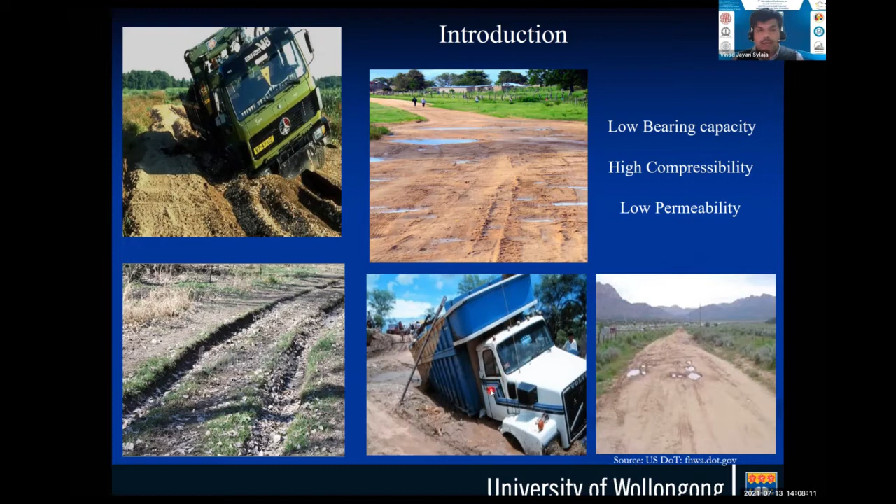So as a practicing engineer, if you face problems on soft subgrade soils, what we generally go with is looking at improving the soil strength by dewatering. And if you look at dewatering, we have a lot of technologies developed in hand. We have preloading, which is a pretty old technique, preload surcharge, or using vertical drains.

So you can see if you have a soft subgrade, you can use a preload and create additional drainage using vertical drains, and accelerate the consolidation process. So we already have established quite well information on how to improve the soil strength using these kinds of techniques.

Now, on the other hand, we do have materials. For example, if you look at the geosynthetics perspective, we have geotextiles, geogrids, and geomembranes, which can basically provide strength towards these materials, and provide additional reinforcement effect for the subgrade, sub-ballast or sub-base materials. You can see a couple of photos I've shown here, where the geogrids have been used between the interface of the subgrade and sub-base layer, acting as a reinforcement mechanism.

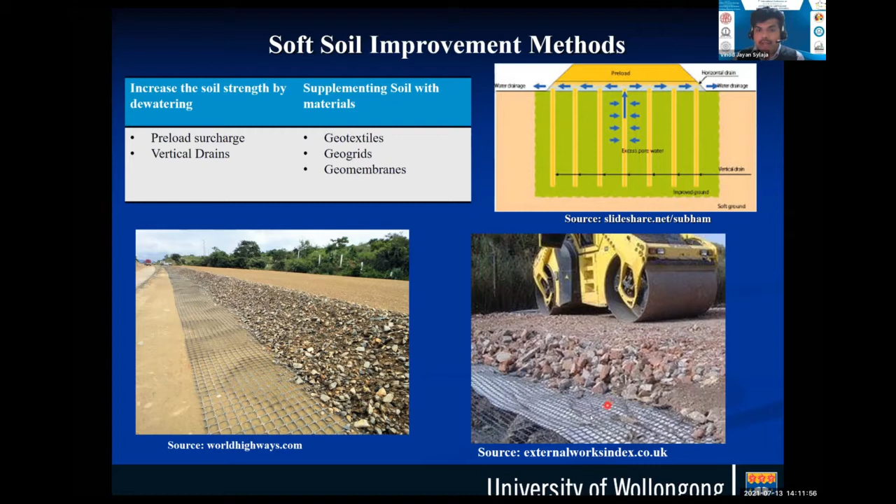Looking at that perspective, the application of natural materials like coir geotextiles and jute gives very promising prospects, as it won't create any kind of unnatural waste materials, thus giving a low carbon footprint.

Now, coming to coir geotextiles, which I'm a bit interested in today to look at and showcase some preliminary findings we have from the numerical modeling. So those who are new to this, as you can see, coir geotextile is basically a thin, flexible, permeable sheet made of coconut fibers, which enhances the mechanical behavior of soil.

And as I've mentioned earlier, we do have a lot of work carried out in this area for the last two decades looking at the improvement in soil stability. For example, if you look at slope stability, we have used coir geotextiles pretty comfortably in controlling the movement or the instabilities of soil slopes.

The advantage of having these kind of natural materials, according to me, is this mechanism needs to be strengthened. It acts like two cases. One, in a short-term perspective, this material will behave exactly like a synthetic material, which provides a reinforcement effect.

And in a long-term perspective, what happens is, due to the biodegradable nature of this material, it can leach lignin into the soil, which leads to a kind of chemical stabilization later on in the soil. So we have observed this kind of mechanism, but we need to understand it a bit more and come out with a model which can be used comfortably by a practicing engineer to predict this behavior for the short-term and the long-term perspective.

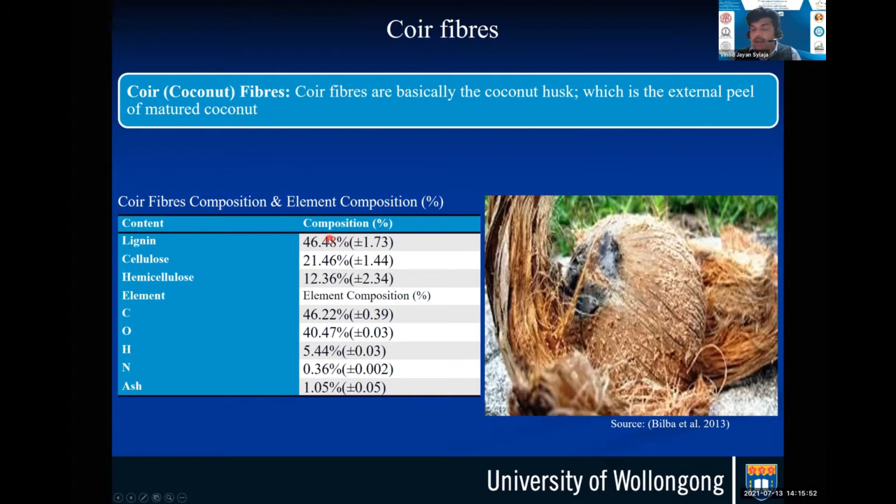In short, you can see coir geotextiles have desirable engineering properties. It's eco-friendly, there's no doubt about it. And you can see the biodegradable nature of the coir geotextiles.

And if I expand a bit on biodegradability, we can see that it has both advantages and limitations. So the major advantage is that it biodegrades, and in a few years time the material disappears. If the infrastructure we are looking at is only for a short-term perspective, we will get the maximum benefit out of this material in that time period, and then it completely degrades.

And if you are looking at a transport infrastructure condition, you can just mix the material up, and it becomes a kind of fiber reinforced soil, which further enhances the properties of the subgrade material. So that's the advantage of it.

And the limitation, as you know, is whether we need to apply this material for a long-term condition or a short-term condition. That's where we need to draw a fine line. And that's where it is highly important to develop a biodegradable model to predict the applicability of this material for infrastructure development. So that is actually our ultimate goal in this research.

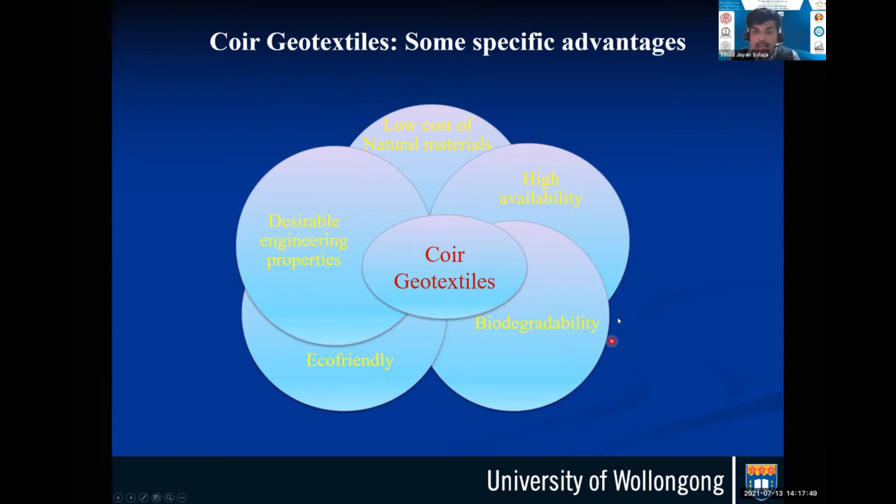With that broad aim in hand, we look at this material in terms of functions. You can see that the major function is exactly the same as that of the geosynthetic material, like reinforcement. It acts as reinforcement, it acts as separation, it has filtration, it can be used as drainage. So it performs exactly similar to the geosynthetic material. The only thing is that the biodegradability of the material needs to be considered in all these approaches.

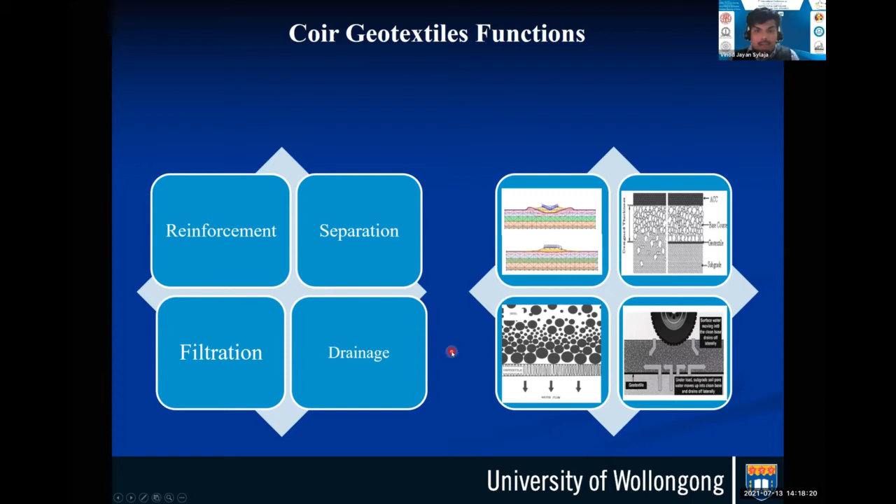So we are trying to use these materials for different infrastructure construction, but we need to understand a bit more from the very fundamentals how this can be designed in the first place for long-term and short-term stability point of view.

Let me quickly show you some work already being carried out experimentally on the bearing capacity or load settlement behavior of this material. You can see a typical load settlement behavior of an unreinforced soil, showing applied pressure versus settlement. For an unreinforced material, if you reinforce it with different coir geotextiles, there is an increase in the applied pressure. So the bearing pressure increases with the inclusion of coir geotextile, clearly showing an increase in stiffness and in the applied pressure or failure pressure with the application of coir geotextiles.

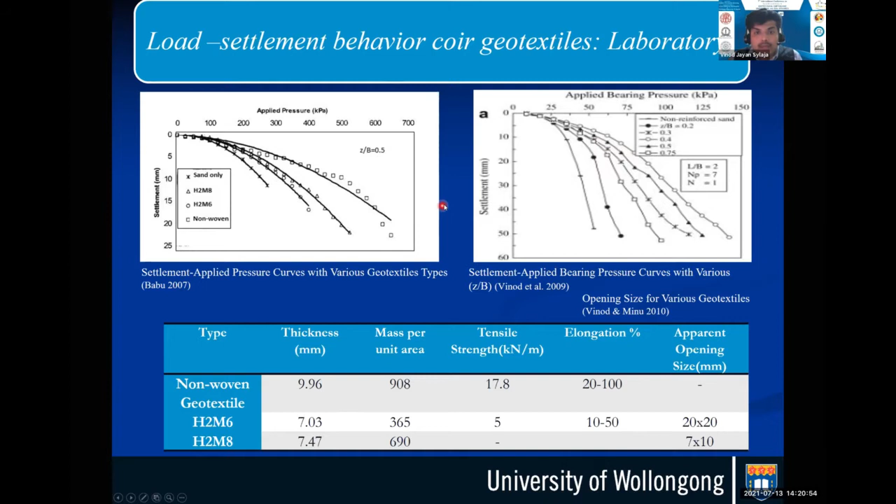When it comes to cyclic load, we could only find very few works on coir geotextiles. What I'm showing here is work on geosynthetics, showing how the settlement responds with and without reinforcement under cyclic loading - how settlement is controlled for different subgrade conditions using with and without reinforcement under cyclic loading.

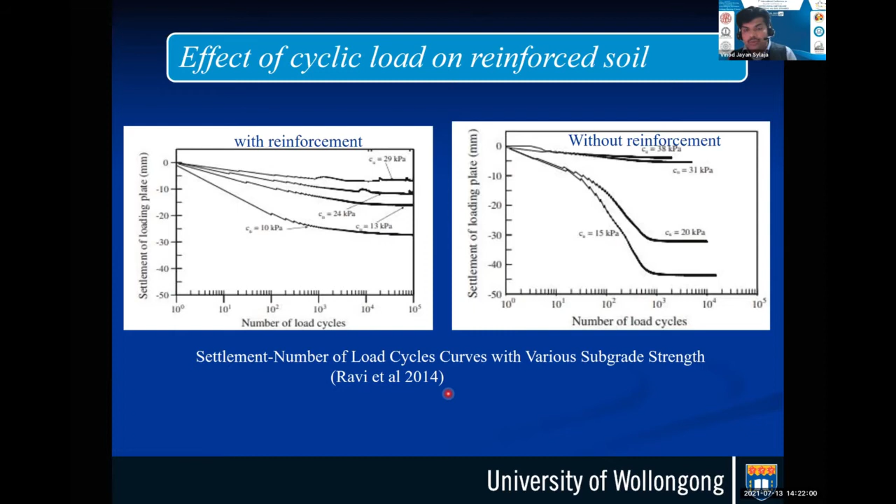Now that's where the challenge lies. We could rarely find literature on the cyclic loading of coir geotextile reinforced soil. Therefore, we are carrying out at our university a detailed large-scale testing on the cyclic loading of coir geotextile reinforced soil so that we can validate these models before applying them to design any kind of transport infrastructure.

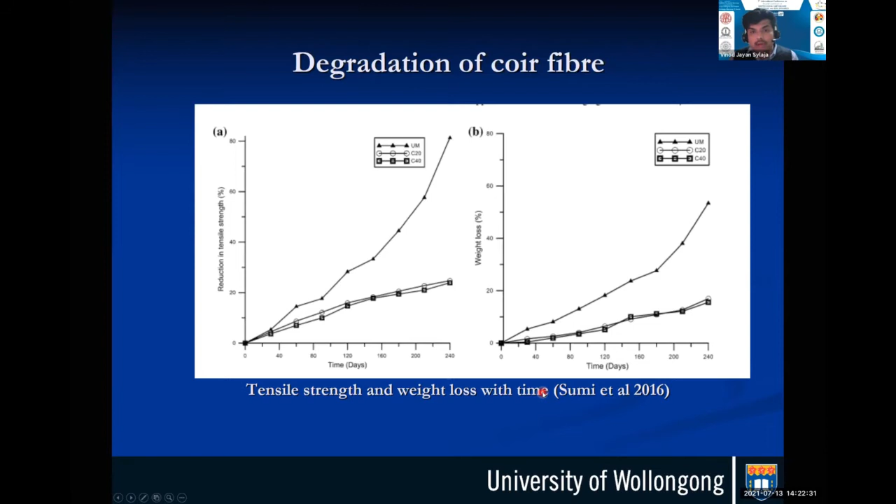So with that, let's move on to the numerical work we have carried out. I divided it into part A and part B, where in the first part we look briefly into the monotonic loading, which was carried out basically to calibrate the model. We have three different conditions to look at.

The first is the unreinforced condition, where layer 1 is considered as a sub base and layer 2 as a subgrade. In the second condition, we have a coir geotextile going at the middle of the sub base layer. And in the third condition, we put it at the interface between layer 1 and layer 2. So these are the three configurations we have looked at in our model.

Our model has a size of 500 by 800, similar to one of the literature studies which shows the load settlement behavior under monotonic loading. The material properties are pretty much the same - we have looked at well-graded gravel.

We have placed reinforcement at the interface and at the middle of the sub base on layer 1. The reinforcement is considered as a plate element using a linear elastic model. For the soil, we have gone for a hardening soil model with small strain stiffness, so that we can capture the variation of modulus with respect to shear strain, which is critical for the dynamic analysis.

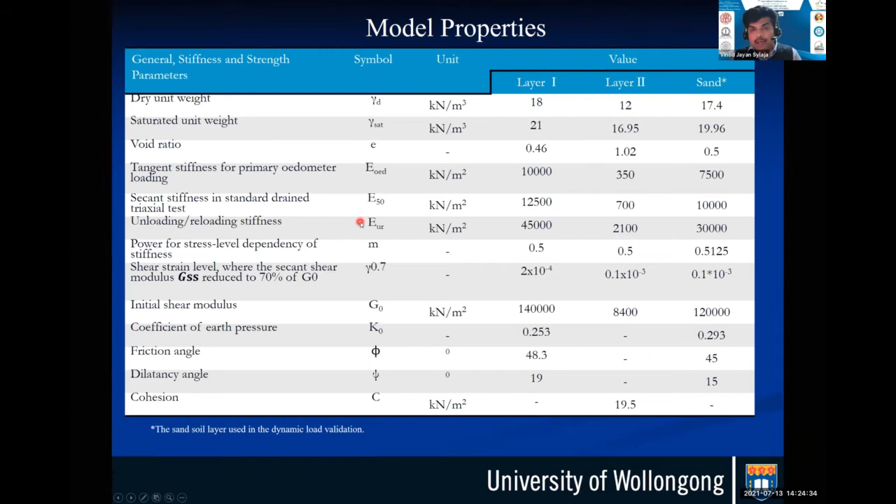I'm not going into the details of the soil properties here, but these various soil properties were adopted based on the work reported by Subaida in 2009 in one of the laboratory experimental works on coir geotextile reinforced soils. After that, we compared and calibrated our model with the experimental data.

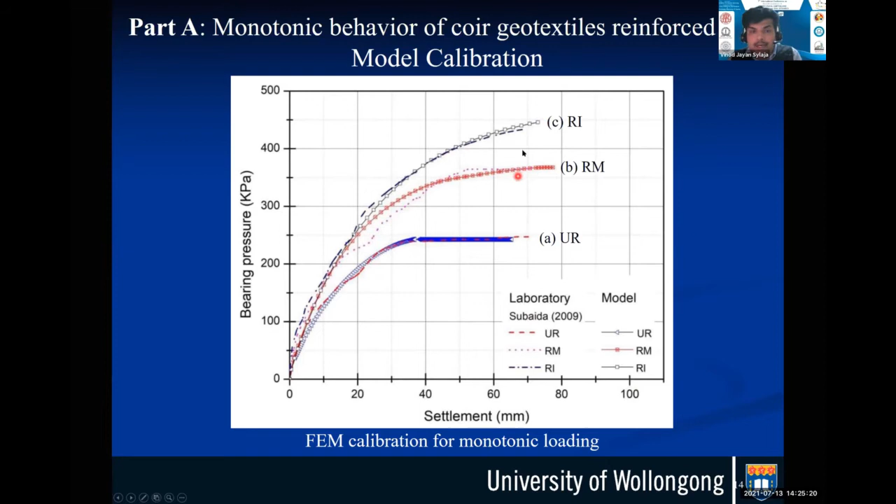You can see that's unreinforced bearing pressure versus settlement response from this finite element model compared to the laboratory work reported by Subaida, with reinforcement at the middle and at the interface. Our model has captured the results very similar to the laboratory experiments. And you can see here at the interface, as expected, has shown a very high bearing pressure compared to the other reinforcement placed at the middle of layer 1.

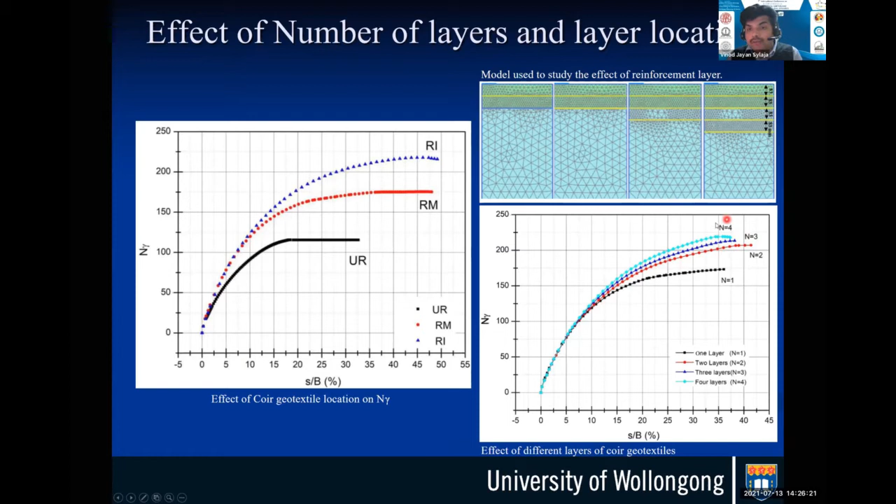We looked at different layers of reinforcement to see whether the number of layers can influence the bearing capacity, and we have observed that increasing the number of layers has an insignificant influence on the increase in bearing pressure. Anything greater than 2 has not contributed much to the increase in bearing capacity. So there is an optimum value that we need to look at when it comes to designing inclusion of geotextiles into infrastructure construction.

We looked at the friction angle, how the friction angle is going to affect the bearing pressure. With increasing the friction angle, the N gamma increases as expected. A similar trend has been observed for the reinforcement at the middle and at the interface. So there are no surprising results here with increase in friction angle. We have observed an increase in the value of N gamma.

Similarly, an increase in the modulus of the subgrade has also shown an increase in the value of N gamma for the unreinforced material, reinforced at the middle, and reinforced at the interface. So these results highlight that our model is able to capture the response very similar to the laboratory investigation.

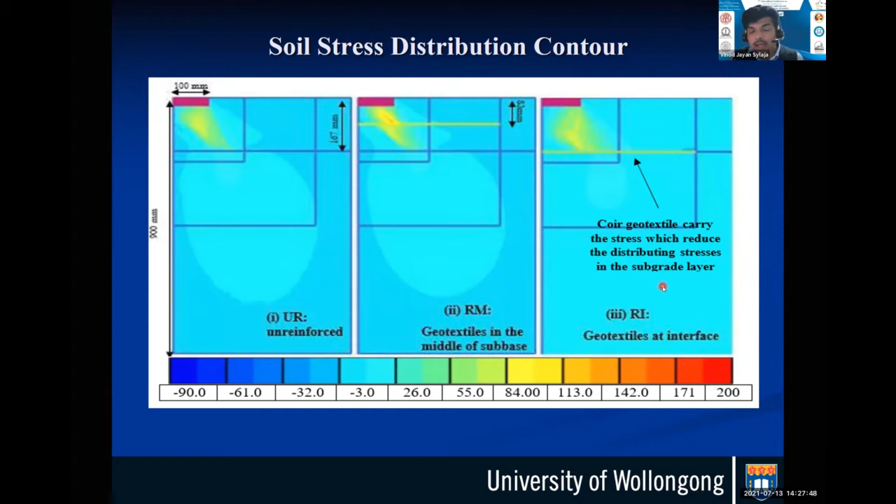Looking a bit more closely into what's really happening inside the sample, you can see how the stress distribution is happening. That's the stress for an unreinforced soil. With the reinforcement at the middle, we could reduce it a bit. But with the interface, we could control the pressure very carefully by reinforcing at the interface of the subgrade and the subbase layer, or layer 1 and layer 2.

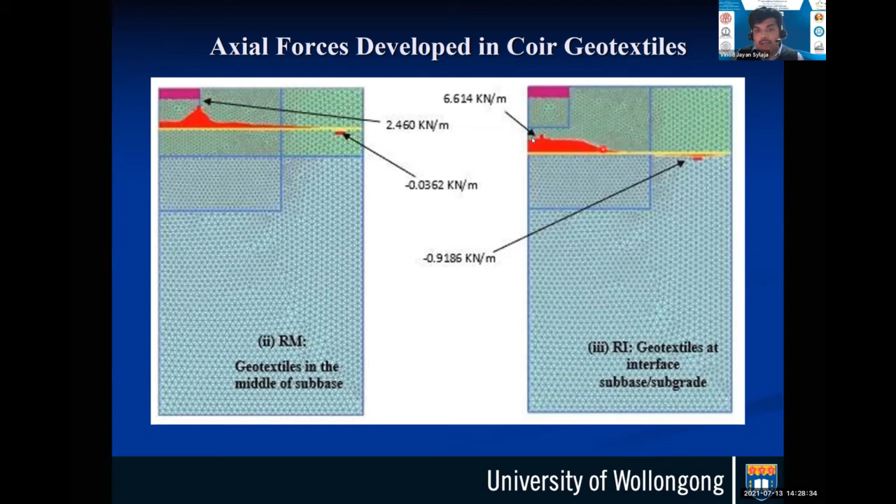Looking at the axial force developed along the reinforcement, you can see a more distributed axial force developed at the interface when the geotextile is placed at the interface between layer 1 and 2, compared to the reinforcement at the middle of layer 1. There's a very high axial force developed here compared to what's reported at the middle of layer 1. So that's a more uniform type distribution, very consistent and similar to what was reported by Kurian in 1997 on the variation of axial force along the reinforcement layer.

All right, with that, I have only 5 minutes here. Let's quickly move on to the cyclic loading of geotextile reinforced soil.

We had gone through a bit of a challenge here without experimental data, on how we are going to model the geotextile reinforced materials under a finite element or Plaxis software. Luckily, we could find one literature by Sridhar and Kumar looking at the cyclic loading of a geotextile reinforced soil in a fully immersed sand condition. So we picked that up to calibrate our numerical model.

We have simulated a different condition very similar to what the laboratory experiment work has been reported by Sridhar and Kumar, and we have tried to capture with our model whether we can capture the variation of settlements with number of cycles very similar to what they predicted in their paper in 2018. The challenge here is to develop a cyclic input in Plaxis software to capture this behavior. That was one of our key challenges.

In modeling or extending this model to capture the behavior under cyclic loading, with the new input that we have created in Plaxis, a subroutine developed in Plaxis, we could capture the settlements versus number of cycles very similar to what has been reported by Sridhar and Kumar under cyclic loading condition for a cyclic stress of 100 kPa and a frequency of 0.5 hertz. It's a very, very small frequency for a traffic condition.

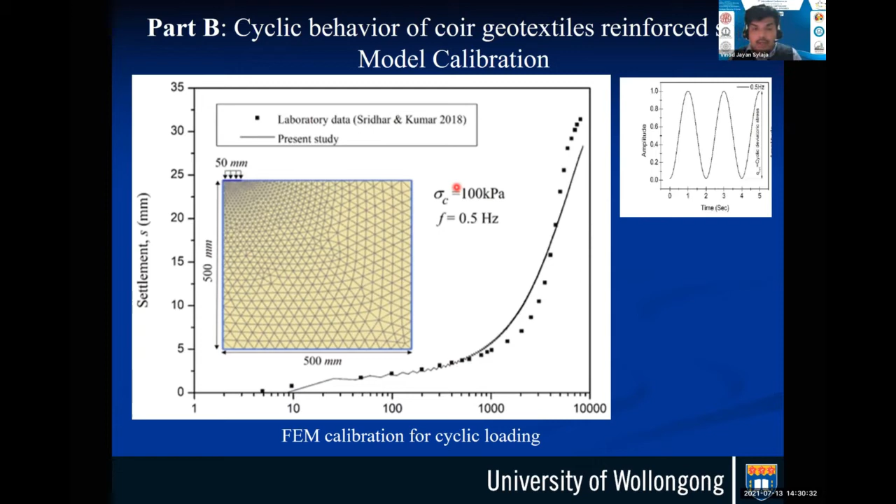We then extended that model, similar to the layer 1 two-layer system which we calibrated in the monotonic condition, to look at the effect of the amplitude of cyclic stress and frequency on the performance of the coir geotextile reinforced soil.

Now we looked at the effect of frequency: 0.5 hertz, 1 hertz, and 1.5 hertz. I'll tell you that's a very small frequency when we're looking at a transport condition, but it still captures the behavior of frequency under different conditions like unreinforced, reinforced at the interface, and reinforced at the middle of layer 1. Similarly, the performance is slightly better when the coir geotextile reinforcement is at the middle compared to the interface under cyclic loading condition.

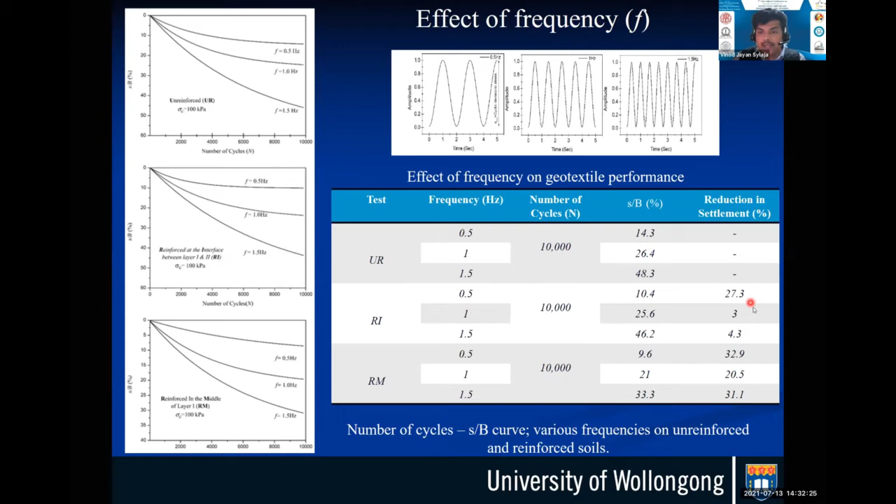Now we looked at that - what's really happening here? We kept everything the same, exactly similar to the monotonic loading condition, but we observed a slightly different behavior compared to the monotonic condition.

We then looked very closely into the axial stress developed on the coir geotextiles, and we observed that a very high magnitude of axial stress, or axial force, has been developed when the coir geotextile is at the mid of layer 1 compared to the interface.

That's probably due to the kind of load application we used under both static monotonic and cyclic loading. In the monotonic loading condition we used a strain-controlled approach, and here it's a load-controlled approach. So there's a significant difference in the performance of the reinforcement due to the application of the load or the type of loading we're trying to do.

We need further experimental evidence to highlight the findings we've observed here. That work is currently in progress.

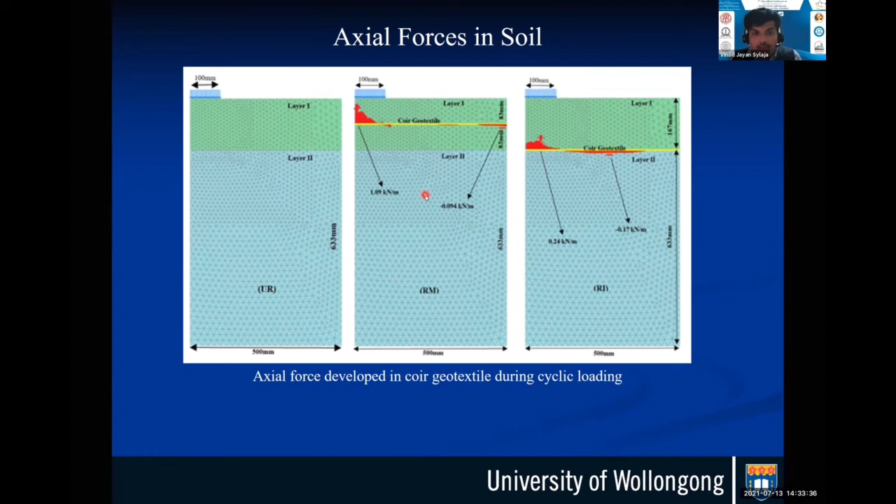So let me quickly conclude: this preliminary numerical model captures the soil bearing pressure versus settlement behavior, very similar to the laboratory experiments reported by Subaida, Sridhar, and Kumar, for both monotonic and cyclic loading.

Coir geotextiles were installed at the interface between layer 1 and 2, and in the middle of the layer, and placing the coir geotextiles at the interface led to the optimum performance under monotonic loading. There's no surprise - a lot of work has been carried out, and this basically strengthens their findings in the application of coir geotextiles.

Now, the number of layers - I've already highlighted that the number of layers shows an insignificant influence for n greater than 2. The application of coir geotextiles between layer 1 and 2 reduces the settlement by around 38%.

So I indirectly calculated the reduction in settlement for synthetic material, which is very, very close from a short-term perspective. So this material can behave very close to synthetic materials in the time frame we're looking at. The performance is quite good. We didn't have a direct comparison, but an indirect comparison shows it can perform very similar to synthetic materials.

The inclusion of coir geotextiles in the middle of the layer yielded the best performance under cyclic loading condition. Please note this is considering the cyclic stress levels we considered in this investigation, which requires further validation using large-scale experimental test data.

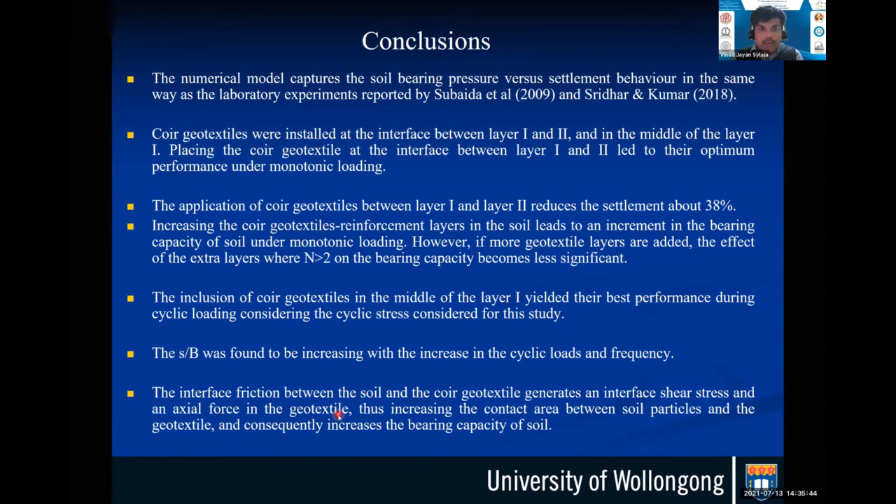Limitation: I need to be very careful about the limitation of application of these coir geotextiles for different infrastructure construction. First, coir fiber degradation and its effects on the response of reinforced soil. It is very critical that we develop a model which captures the degradation of the coir fiber, and that needs to be integrated into any model to capture the short-term and long-term perspective.

If we can predict the time frame up to which this material is going to perform, that is exactly what a practicing engineer will be looking for before a wide application of this for any infrastructure development. Effect of different sub-base and subgrade material, including stress rotation during traffic loading, needs to be investigated.

High frequency, we have only looked at around 1.5 hertz, which is very small for a traffic condition, and we need to look at a very high frequency and very high cyclic stress amplitude before applying this to any kind of pavement infrastructure. Finally, we need large-scale validation of the model with detailed large-scale and field investigation, which needs to be done before applying this to any field application.

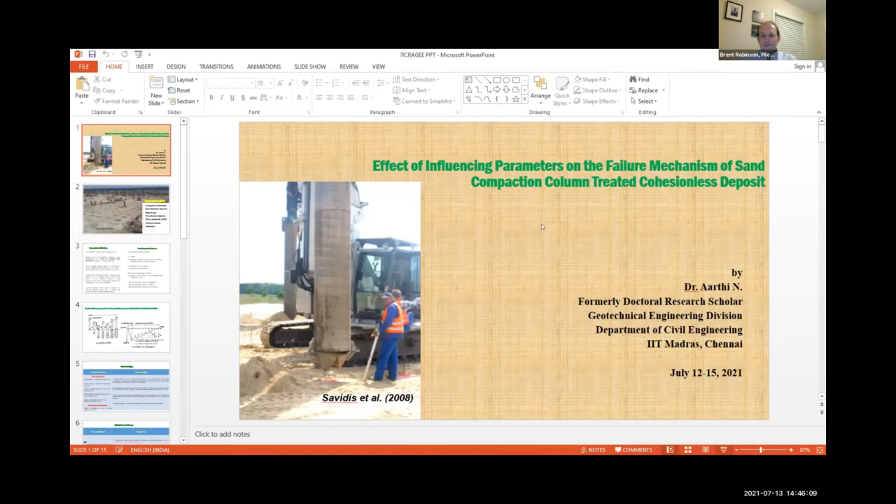Are you guys able to see my screen? Yes, we are, and we can hear you very nicely. Thank you. One minute, is it fine, sir? All good, still to go? Good, thank you very much. Go ahead. And can you give yourself a brief introduction too?

Yes, myself Aarthi Natarajan, and I've recently completed my doctorate in Geotechnical Engineering from Indian Institute of Technology Madras. I'm presently working as a lecturer near my hometown in Tamil Nadu. I'm very happy to be here to present my work. This is one among the part of my PhD work, and good to meet you all for this nice occasion. So let us start, I'll try to stick to the timings since I have a class to go.

So this is basically about one among the ground improvement techniques called sand compaction piles. This is a very specific topic that will be keenly focusing on the effect of influencing parameters on the failure mechanism of sand compaction column treated cohesionless deposits.

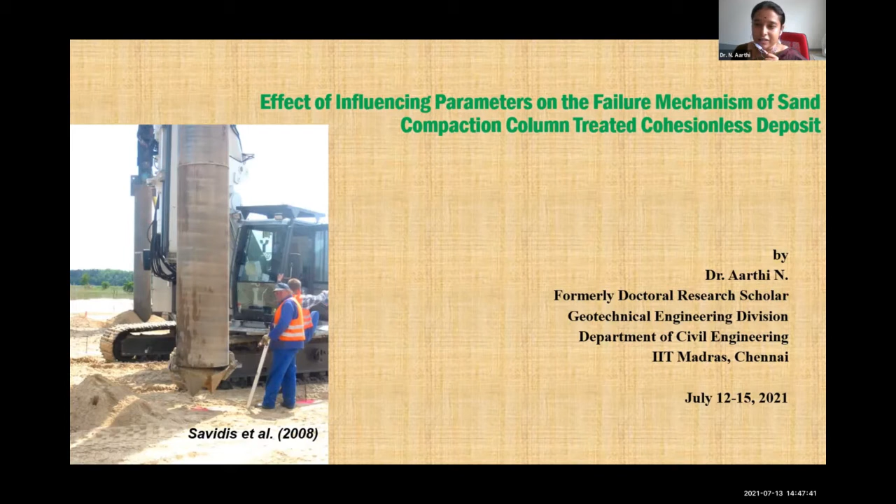This is a picture showing a field application. This is a casing that has been used in most cases - one among the casing equipments that are often used in field applications to install these sand compaction piles. I thought it very appropriate to put this picture on my front slide so everyone right away understands what I mean by sand compaction pile.

Coming to the outline of my presentation, this is how it will go: introduction and motivation behind the study, sand compaction columns - what are they, the research gap - what exactly is the gap and where my work is fitting into the literature, finite element modeling and failure mechanism of sand compaction columns, the parametric studies, and the conclusions.

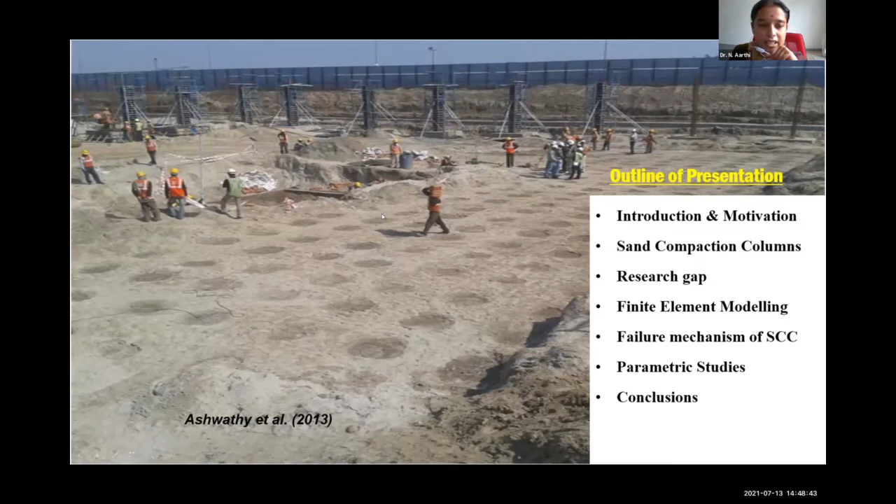This has been taken at an actual site near Ghaziabad in Delhi, where sand compaction piles have already been carried out in the field. You could see it is of a square pattern, already installed in this particular layout, and it is yet to be installed over there while the workers are doing it. This has been taken from an article by a good friend of mine.

Straight into the topic - I just want to introduce it to you all. In India, we have majorly 3 problematic deposits: loose sands, marine clay, and expansive soils. Among these, my area of work is on loose to medium sand deposits to improve their bearing capacity, etc. When you look upon any type of granular column inclusion, vastly there are 2: stone column and sand column.

As far as stone column is considered, you have n number of articles so far, and the entire Western Hemisphere has done so much about stone column. Sand column is the contemporary of stone column, and it is much more famous in Southeast Asian countries, including Singapore or Japan. It is a method invented in 1956 in Japan - the art of carrying out a sand compaction pile or column, whatever you can name it.

As far as this topic is concerned, moving on to finding how sand compaction pile installed cohesionless deposits - that is, improved cohesionless deposits - fail and their failure mechanisms, and what parameters would affect such improved deposits in real-time application - that is my cup of tea as far as this article is concerned.

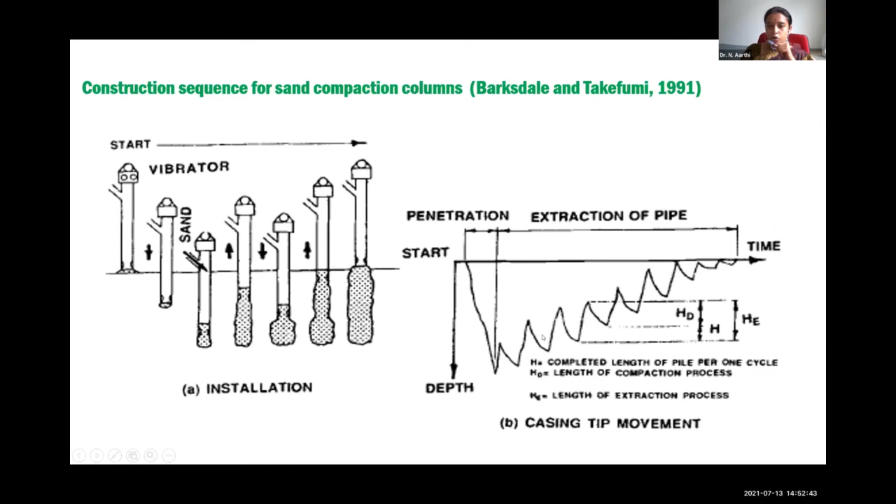Coming to the research gap: stone columns are contemporary to sand compaction columns, and stone columns have numerous articles covering static loading, cyclic loading, lateral loading, stress sharing mechanism, and failure mechanism of stone columns in clays. But such in-depth studies are very hard to find for sand compaction columns in cohesionless deposits. I was able to find only one study, and that too in clay only; in sand there is literally none. So this attempt is addressed to fill that gap of having a failure mechanism study of SCC in cohesionless deposits. This is my research gap.

So far, only one article has been reported on SCCs in clay, by Takefumi et al. in 1991, where there is a pictorial representation. In those times, sophisticated software wasn't available, so only a clear photograph was given and reported in that article.

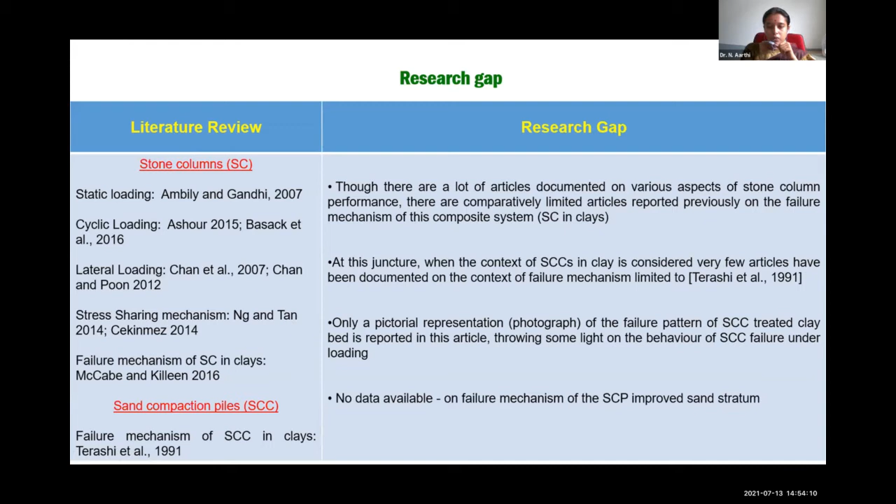My present attempt will study how the failure wedges move when compression loading is applied on top of the foundation.

The aim is clearly represented: to study the failure mechanism of SCP improved sand deposits for variations in parameters. These parameters are four in order: initial relative density, diameter of the compaction column or pile, column length, and spacing between the columns.

This particular article deals only with the numerical study and only for the prescribed range of parameters, which will be given below. This is the prescribed range of parameters for each parameter taken.

We have created a base model using Plaxis 3D, with initial RD of 30%, pile length of 20 meters, diameter of the SCP of 0.6 meters, and spacing between piles of 2D. This figure shows the soil cluster, soil domain, soil volume, and the pile cluster in the center. Only the center three piles will be loaded for behavior study, surrounded by a row of piles to replicate field situations. The entire domain is 25 by 25 by 25 meters to clearly represent a field scenario.

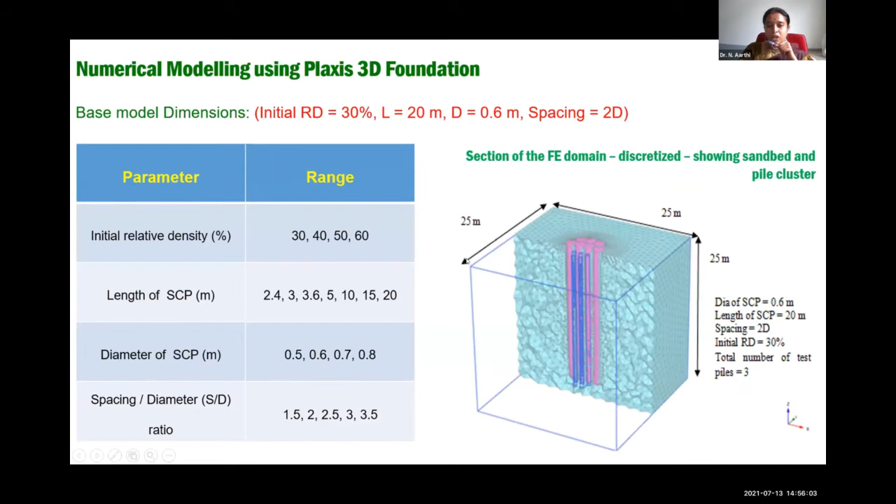Coming to an in-depth view of the failure mechanism, how far the wedges go and what shape they take: we took a section at the center of the domain, as in the previous picture, and this is how the wedges protrude through the improved deposit. These are superimposed lines to clearly explain how the wedges move. You can clearly see a Terzaghi's failure wedge with minor changes; instead of a logarithmic spiral, you can see the spiral wedges deepening here. This is for the base model range of parameter values.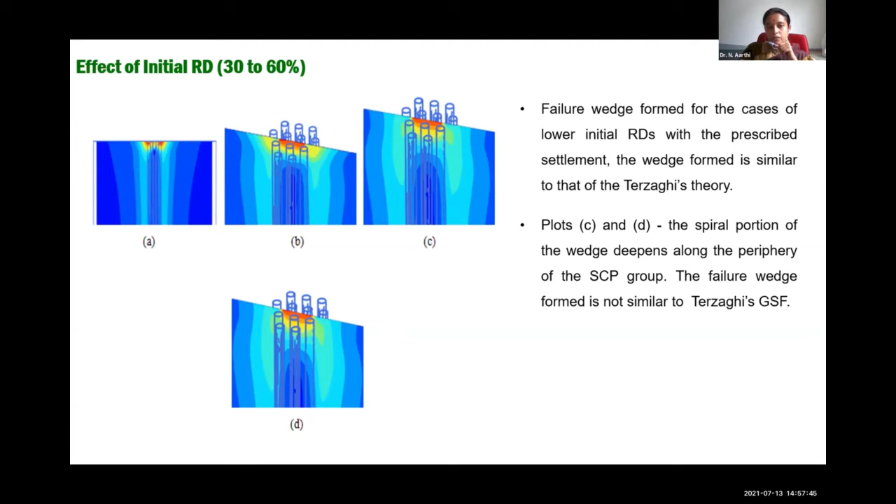That is the inference from this. Coming to the pile length, we have critical pile length and exact pile lengths. For critical pile lengths, the deformation extends up to the bottom of the pile, within 5 meters, whereas for the other ranges, 5, 10, 15, and 20 meters, we have a nominal wedge. For all these cases, you can observe the Terzaghi shear failure below the full foundation footing. So we can come to a conclusion: irrespective of the pile length adopted, the SCP-improved cohesionless deposit undergoes general shear failure.

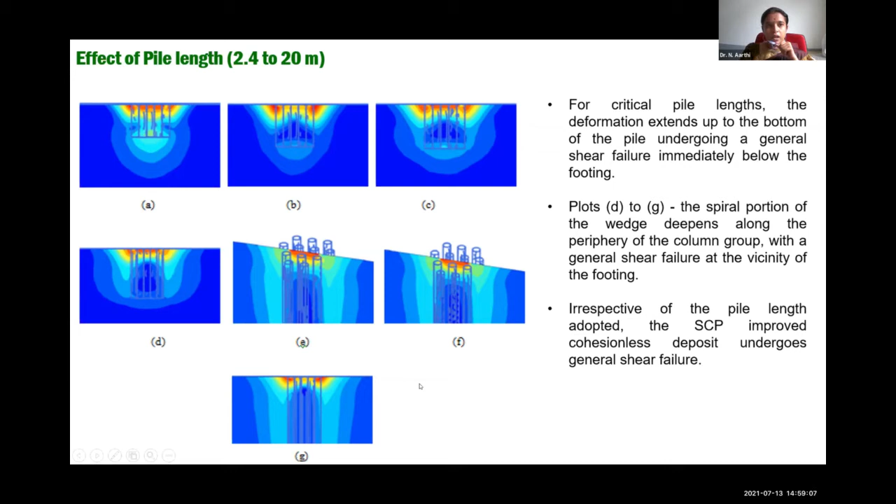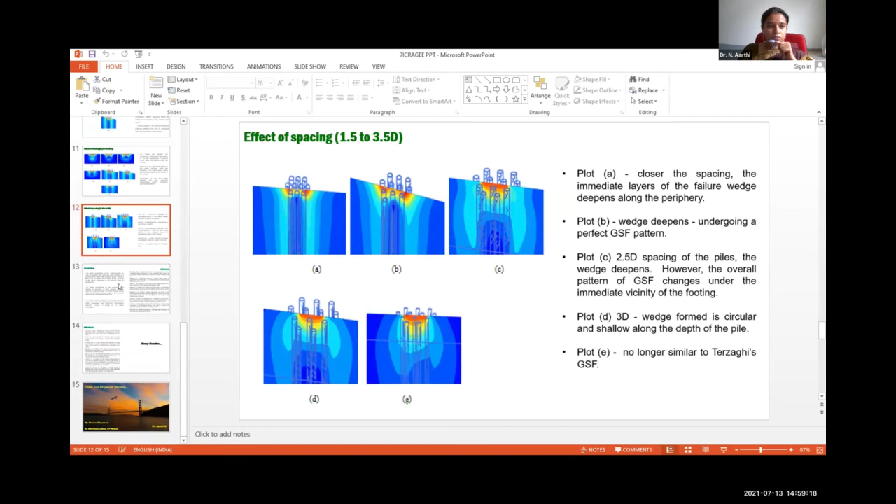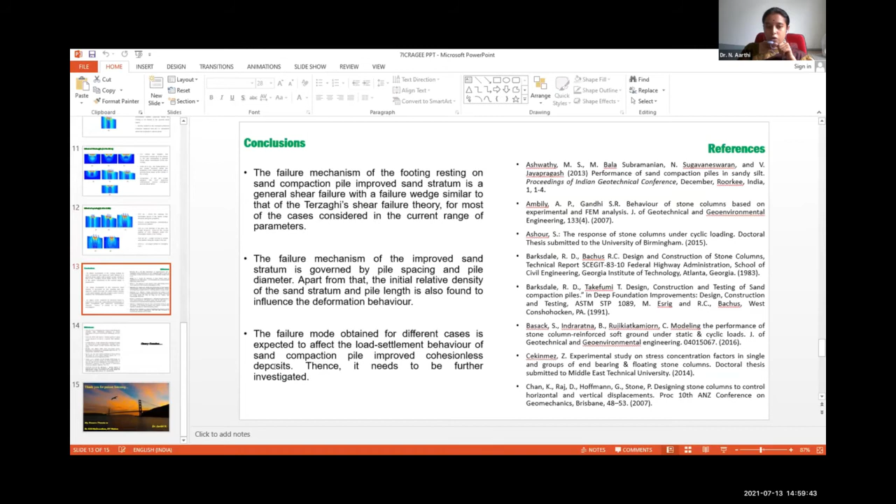Coming to the conclusion, the failure mechanism of the footing resting on sand compaction piles is a general shear failure, similar to that of Terzaghi shear failure. It is mainly governed by pile spacing and pile diameter, however others are also found to have some effect on it. This is obtained for different cases, and this is expected to affect the load settlement behavior of the improved deposit also. So yeah, thank you for the patient listening.

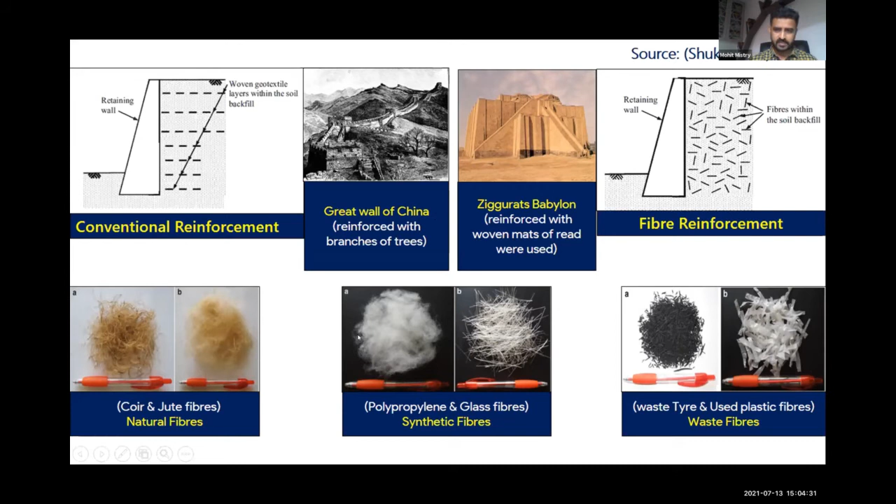I will not go into the detail of this. With the ever increasing modern civilization, growth of industries has increased, and because of that, the number of vehicles is also increasing. As per ATMA 2017, per day in India, 6.50 lakh tires are being produced, and their production will increase up to 60% by 2022.

In this plot, we can see how fast it has increased. And from that 6.50 lakh tires, 2.75 lakh tires are being converted into waste per day. For a lot of governments of the world, it is a chronic issue that should be solved, because it occupies 80% of the voids in landfills, and it also occupies more land for disposal. It is also more prone to fire hazards.

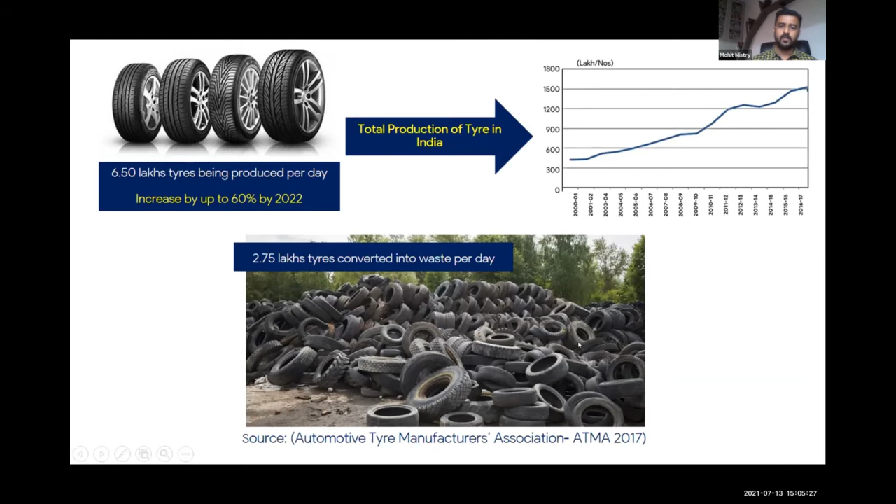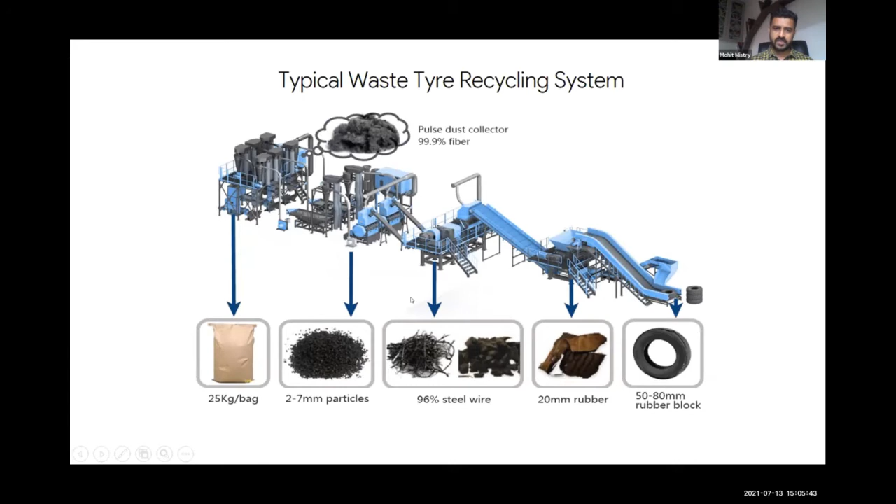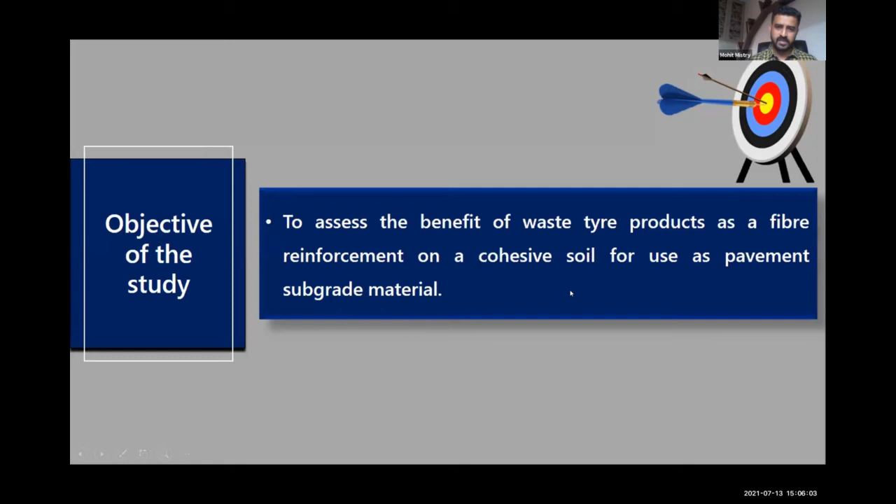These are various products which are being used in civil engineering constructions for different purposes. For this particular study, our main objective was to check the benefit of these tire products in the form of fibers for the reinforcement of cohesive soil, which is used as a pavement subgrade material.

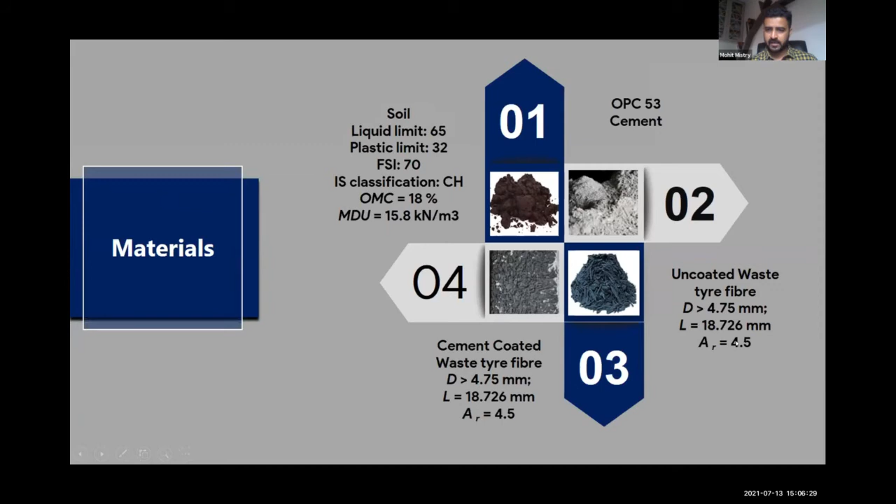These are the four materials. As an unreinforced material, we used a clayey soil with this liquid limit and plastic limit, and as per IS classification, it is a high plasticity clay. Then we used OPC 53 grade cement to coat these fibers, and these are the uncoated fibers. Both types of fibers have an aspect ratio around 4.5.

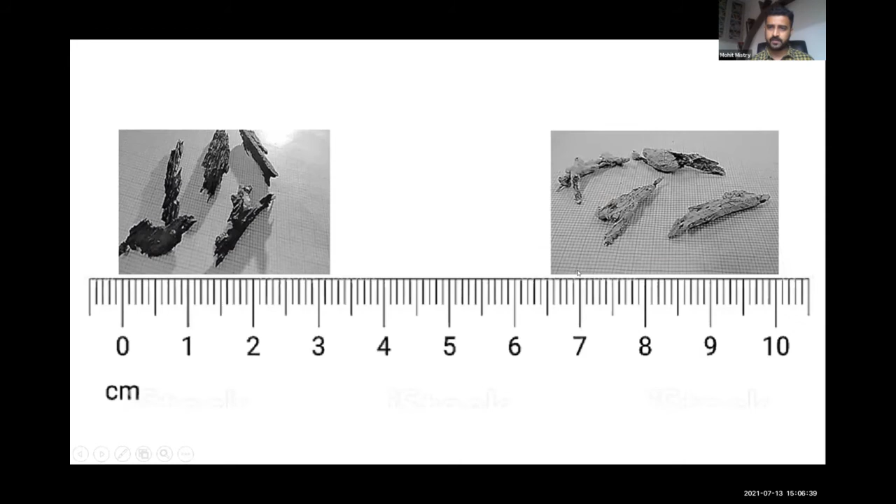Generally these waste tire fibers have specific gravity varying from 1.13 to 1.36. But the fibers we used are without metal content, and so they have a specific gravity of 1.15.

Totally 9 compaction tests were conducted using 0.25, 0.5, 0.75 and 1% fiber content, plus 0 for unreinforced soil. Fibers were mixed with the soil on a dry mass basis, because fibers have a non-uniform shape, so volume fraction was not possible. That's why fibers were added into the soil by mass fraction. So 4 compaction tests with uncoated fibers, 4 with cement coated fibers, and 1 for unreinforced soil, totaling 9 modified compaction tests.

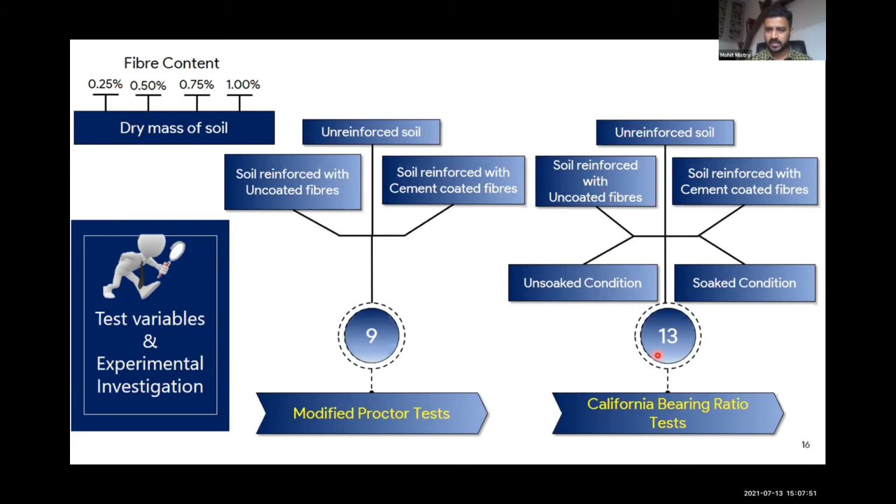Similarly, 13 CBR tests were conducted to simulate field conditions of normal rainfall and heavy rainfall, under unsoaked and soaked conditions. So a total of 13 CBR tests were conducted.

The first question that arises is how we coated the cement fibers.

Initially from the literature we have several options to mix the fibers into the soil - in dry form, or we could prepare the mixture of the soil in wet condition and then add our fibers. So in our case we have used cement, OPC 53 grade cement, with 30% water content. The reason behind selecting 30% water content was that OPC 53 grade cement was having a liquid limit varying from 28 to 33, so on average 30% water content was used to prepare the cement slurry.

Even in the cement slurry, we had several options: 1:1, 1:1.5, and 1:2 fiber cement ratio. Among those, maximum specific gravity was achieved with the 1:2 fiber cement ratio, so for further study we used this proportion for the cement coating. We tried 1:2.5 also, but that created lumps and improper coating was done, so we stuck with the 1:2 proportion for the fiber cement ratio.

Now for the curing period of the cement slurry, we used only 24 hours, because after dipping the fibers into the cement slurry, we wanted to maintain the flexibility of the fiber. If we used more than 24 hours, the fiber may get brittle and it may affect its purpose of achieving good tensile strength. So for that, we used only a 24-hour curing period.

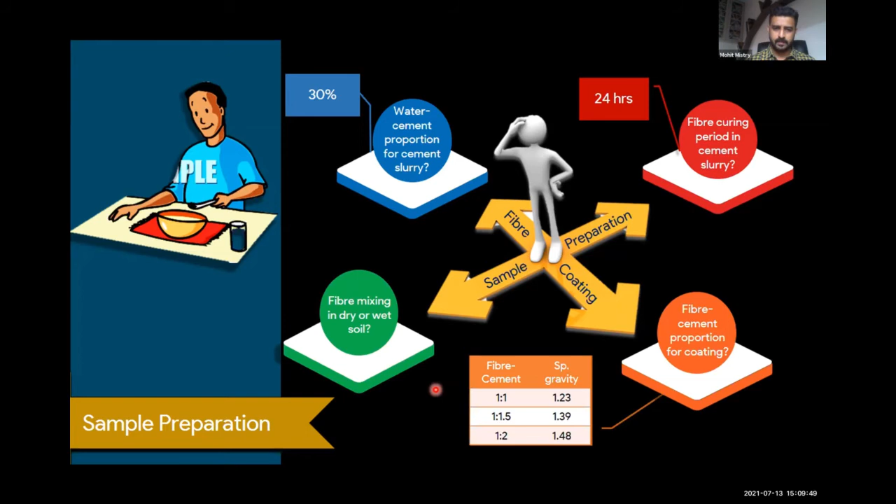Coming to the resultant discussion, fluctuation in compaction tests was seen in OMC and MDD always. The modified compaction tests were conducted as per IS part 8, and fluctuation in OMC was seen because of the rough surface of the fibers and their non-uniform shape. In some cases, the superficial gap absorbs water, enhancing the OMC.

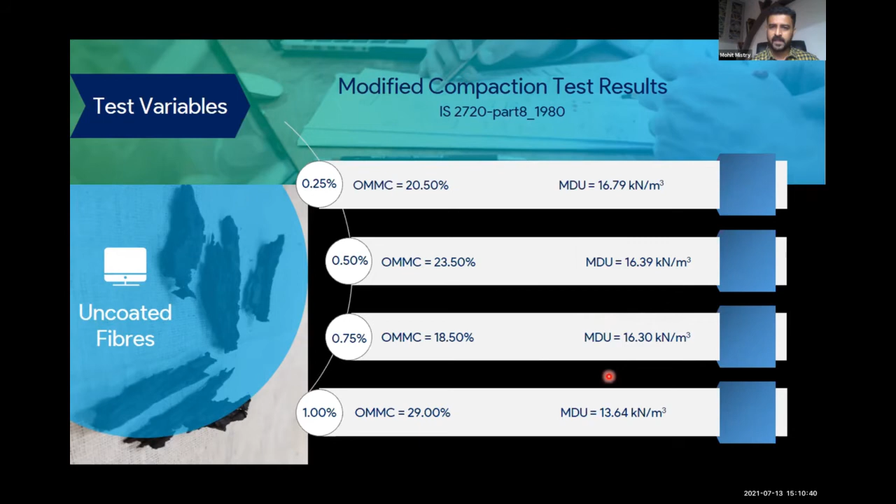Coming to the CBR results, for better results with these fibers, we can see from the load penetration curve that this star line shows the unreinforced soil. We can see that after a certain load increment, the curve becomes flatter, whereas in the case of reinforced soil, the load penetration resistance is increasing gradually.

So we can say that the high tensile strength of the fiber is playing its role, and in the initial portion, the discrete fiber delays the development of the failure plane. Hence, the fibers have high energy absorption capacity, which is why they can resist more load.

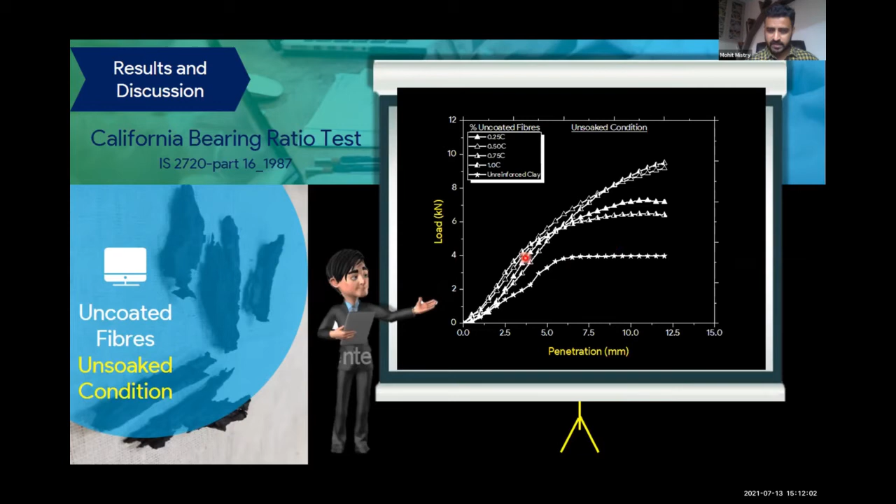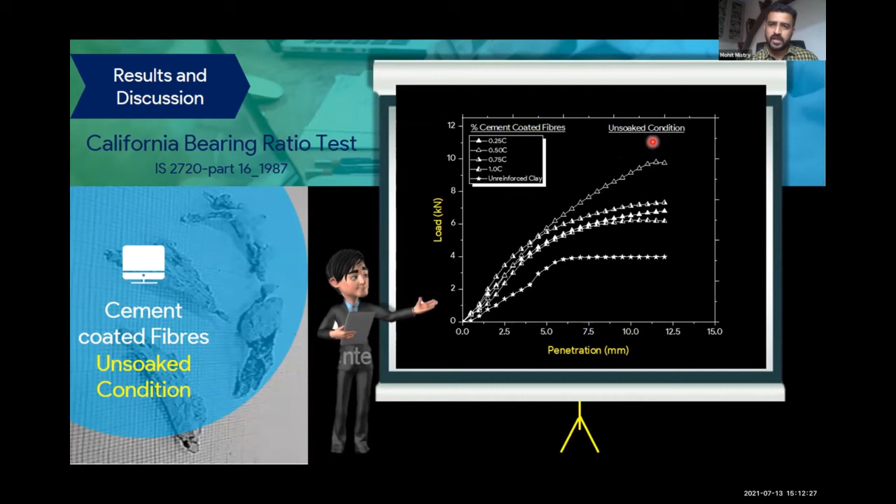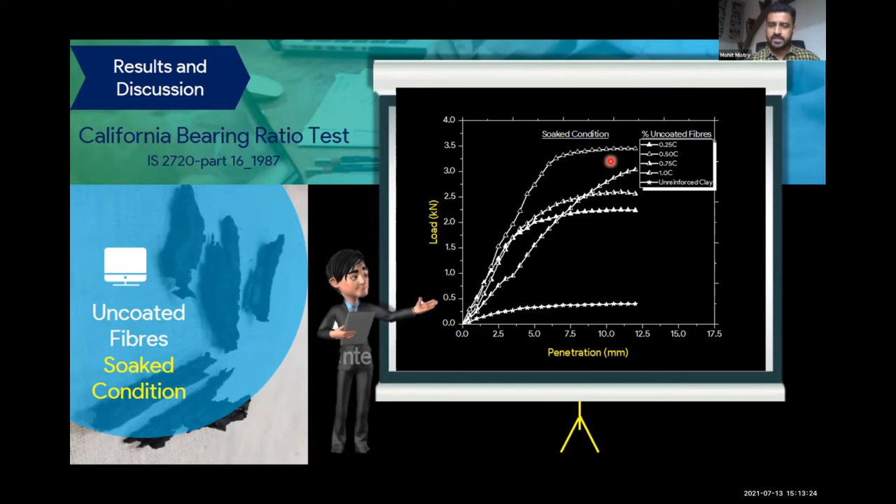Similarly, in cement coated fiber in soaked condition, you can see it is enhancing even more. Here, for the 2.5 mm penetration and 5 mm penetration, for the 0.5% and 0.75% fiber content, it shows the higher results of the CBR value.

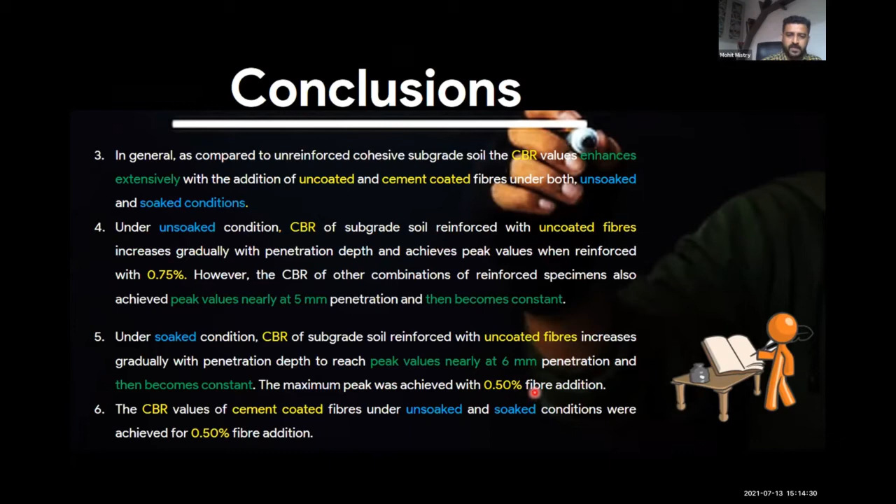So for the conclusion, in unsoaked condition, CBR of subgrade value for the uncoated fibers achieves peak at 0.75% fibers. In uncoated fibers, soaked condition, it becomes almost constant after 6 mm penetration, and that higher peak value is achieved only with 0.50% fibers. Here you can see better results with the CBR value: initially it was around 10, but with the addition of this, it achieves almost 16. So almost 2 times enhancement for 2.5 mm and 5 mm penetration. Similarly, in unsoaked condition, overall in uncoated and coated fibers, it is enhancing 3 times to 6.5 times.

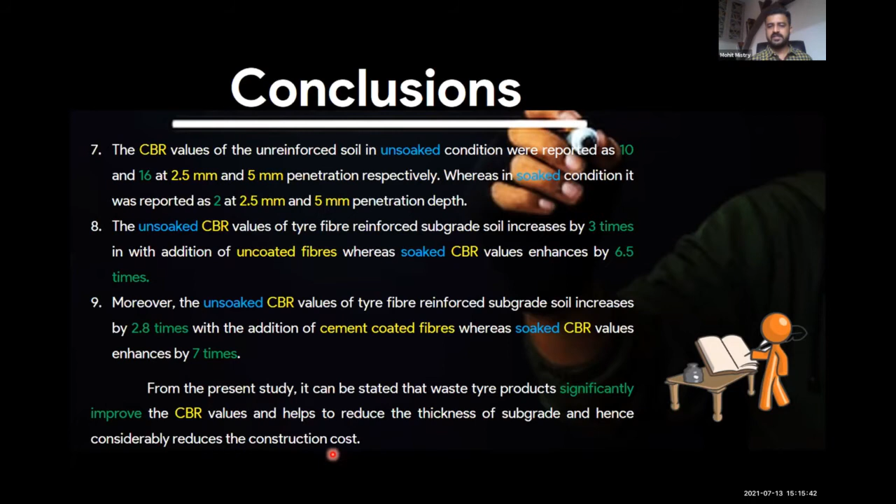But major benefited results can be seen for the soaked condition, because in the field, usually in soaked condition, soils give lesser CBR values. But with the addition of the cement fibers, as compared to uncoated fibers and as compared to unsoaked condition, in soaked condition CBR values are more. It is enhancing from 2.8 times to 7 times, whereas in unsoaked condition it is only up to 6.5 times. So we can see that the addition of the fibers can give better results for use as a reinforcement material, and it is also a more economical option.

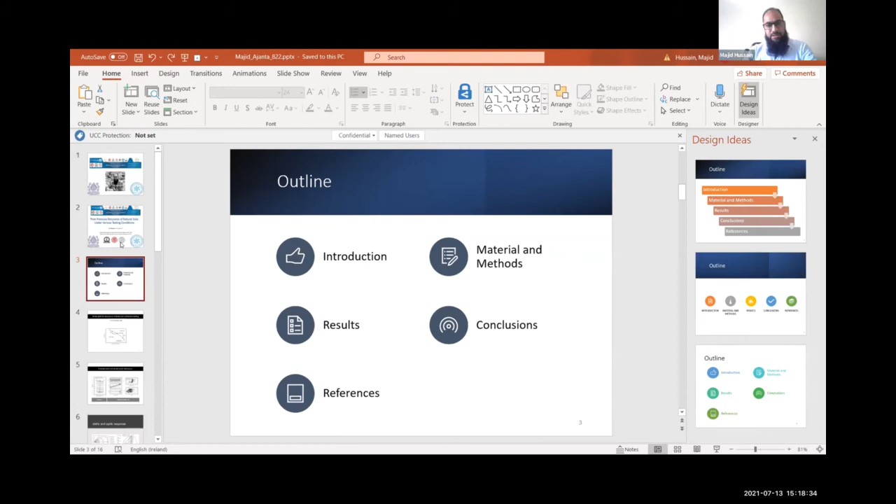Good afternoon, everyone. Today I will be speaking about the pore pressure response under different conditions. The brief outline of my presentation will be: first, a very brief introduction about the pore pressure response, then we'll discuss briefly the materials and methods, after that we will go with the results, then briefly discuss the conclusions, and then references.

So if you look at the stress path for monotonic drained and undrained loading from the basic constitutive behavior of these materials, we can see that under drained conditions there is a change in volume and we allow that. If that is restrained and we go into undrained conditions, pore water pressure develops, be it static loading or cyclic loading. Then how it is allowed to drain will actually determine the soil behavior.

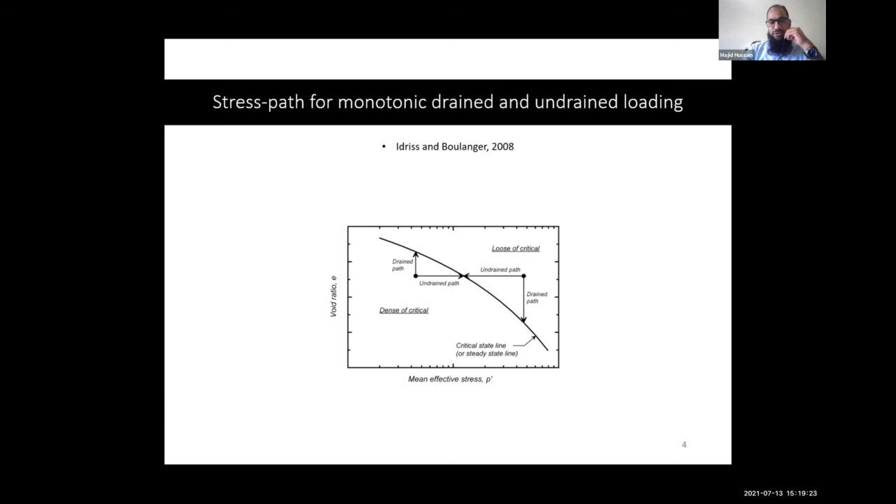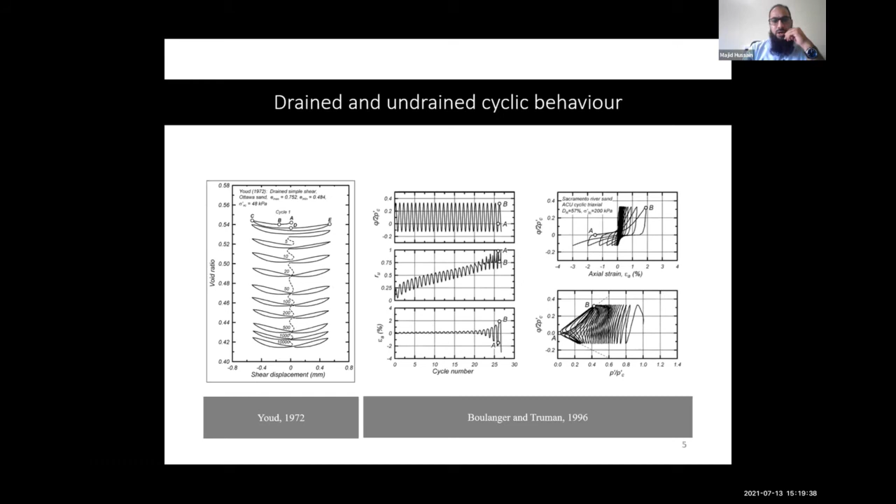So in case of monotonic undrained loading, we can see pore water pressures leading to static liquefaction. Similarly, under drained and undrained cyclic behavior, if we allow the volumetric change, that will lead to settlement. In the undrained case, that will lead to development of pore water pressure, which ultimately leads to earthquake liquefaction under load.

Similarly, under cyclic loading, if we look at the stress path, it has a particular relationship with undrained monotonic loading. Now for materials and methods: in 2001, there was an earthquake in the Indian state of Gujarat, a 7.6 magnitude earthquake, and there was devastation from both structural and geotechnical perspectives.

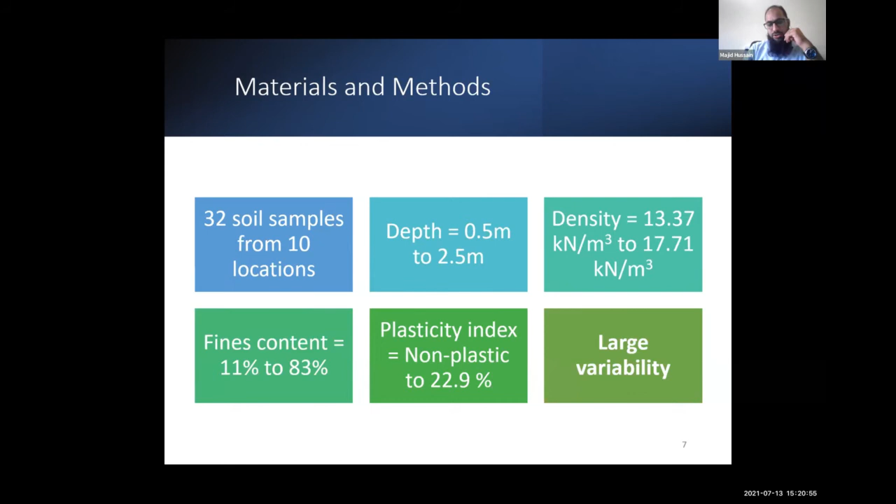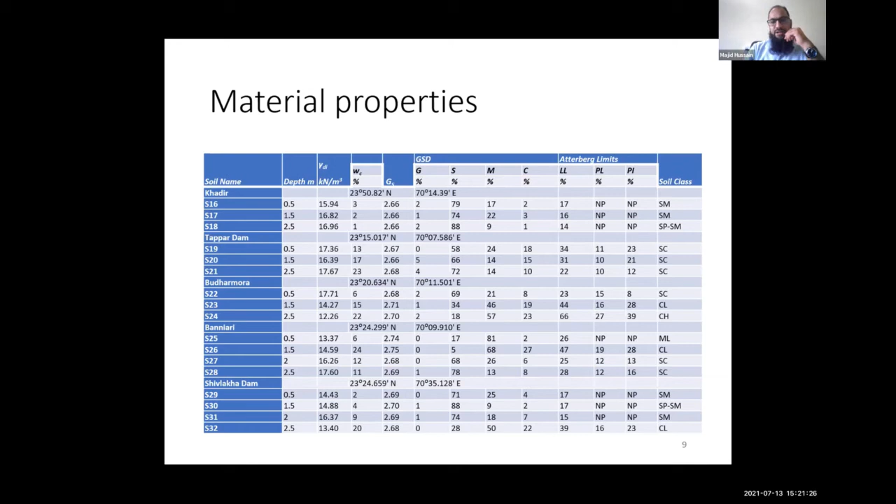We collected 32 soil samples from 10 locations, including around 5 dams and 5 residential areas. There was very large variability in fines content, plasticity characteristics, and density. These are the material index properties of the soils; around 19 were cohesionless soils, silty sands and sandy soils, and a few were clay soils, collected up to depths of 2.5 meters. Clay content varied, and fines content reached up to 83%.

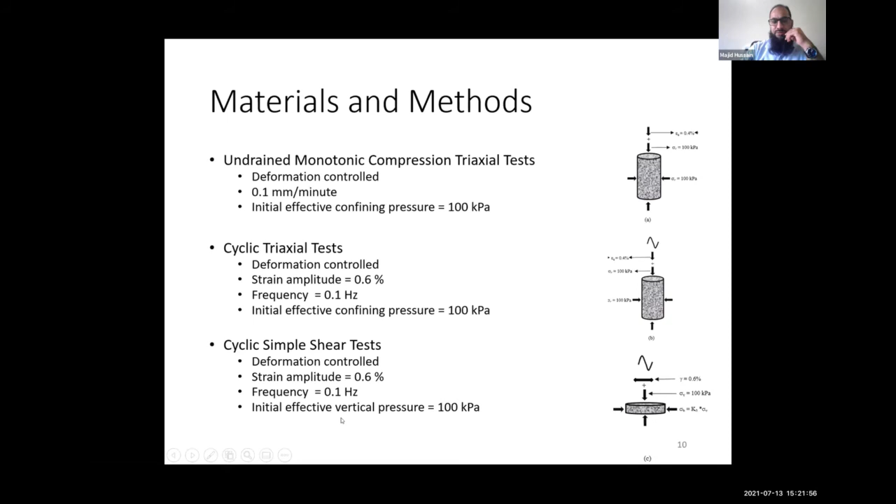Regarding testing, we performed monotonic compression triaxial tests under undrained conditions and cyclic tests. All tests were deformation controlled; the cyclic tests included cyclic triaxial tests and cyclic simple shear tests. Under cyclic simple shear loading, load is applied in the horizontal direction under an applied effective vertical pressure. In all three tests, we used 100 kPa of effective vertical pressure.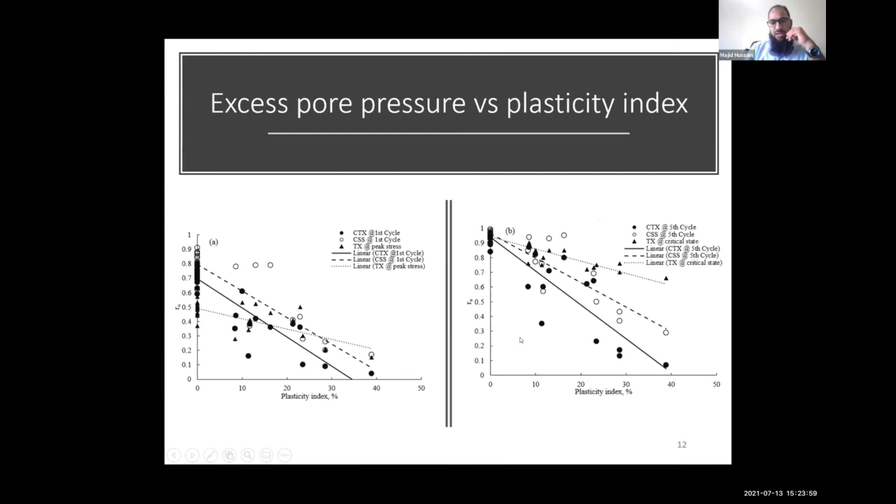Now looking at the grain size index of the soil, this parameter relates to the particle size distribution of the soils. It is a ratio representing how much area lies under the grain size curve between particle sizes of 0.001 mm to 75 mm. It removes very heavy particles which are less susceptible to liquefaction due to heavy gravity force.

It also discounts for very small, cohesive particles. We know cohesive soils and very heavy boulders are not susceptible to liquefaction. It is the soils with very low weight and very low cohesion that are actually susceptible to liquefaction.

For the soils in the Kutch region of Gujarat, most soils lie within the range of 0.4 to 0.8, that is, silty sands and fine sands, which are susceptible to liquefaction, as reflected by the pore water pressure response under different conditions.

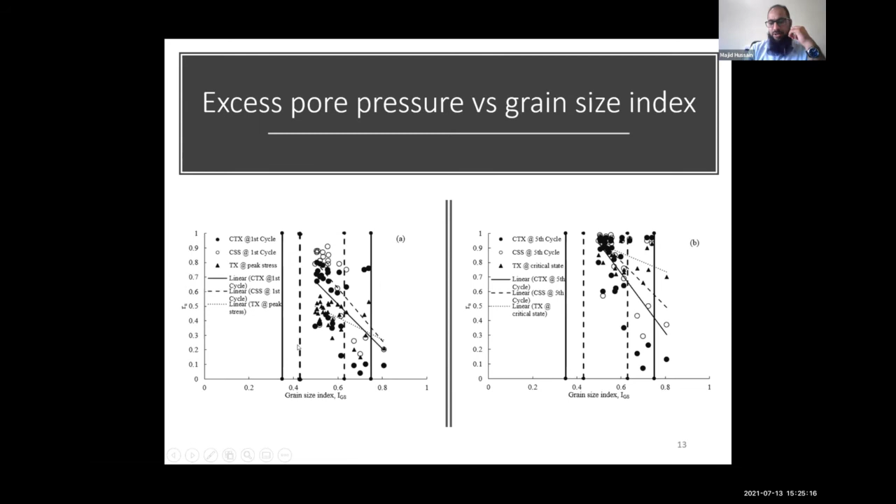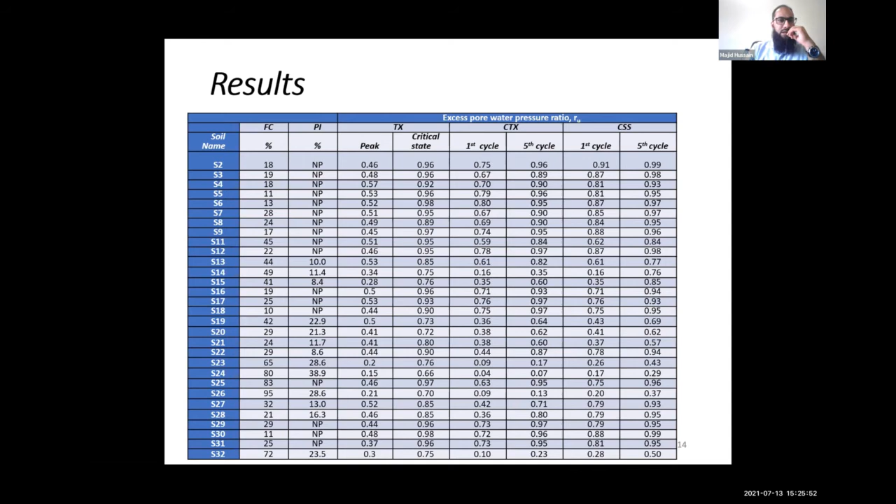If you look at the results here, the pore water pressure response at the fifth cycle is very large, very huge. We can actually conclude that for these soils, the liquefaction resistance is very low, and these results show that they better simulate the actual results. This was also observed in the field, along with the structural damage that was manifested from the phenomena of liquefaction. The conclusions from the study are that very large pore water pressures under both monotonic and cyclic conditions may lead to static and cyclic liquefaction. In cyclic liquefaction, it has been manifested during earthquakes like the 1956 and 2001 earthquakes.

In case of cohesionless soils, granular soils, it is actually the fines content that controls the constitutive behavior of the soils. However, for clayey soils, or cohesive soils, it was actually the plasticity index rather than the fines content.

Cyclic simple shear tests resulted in pore water pressure that was actually 1.3 times that of the cyclic triaxial. So we can say that the cyclic triaxial underestimates the pore water pressure development, which in turn overestimates the liquefaction resistance. So we have to take care of the results from different tests.

The rate and magnitude of pore water pressure generation was actually decreasing with fines content as well as plasticity index. So we can conclude that cohesionless soils with very low plasticity index are most susceptible to liquefaction, and this has been observed during these earthquakes also. These are the references here.

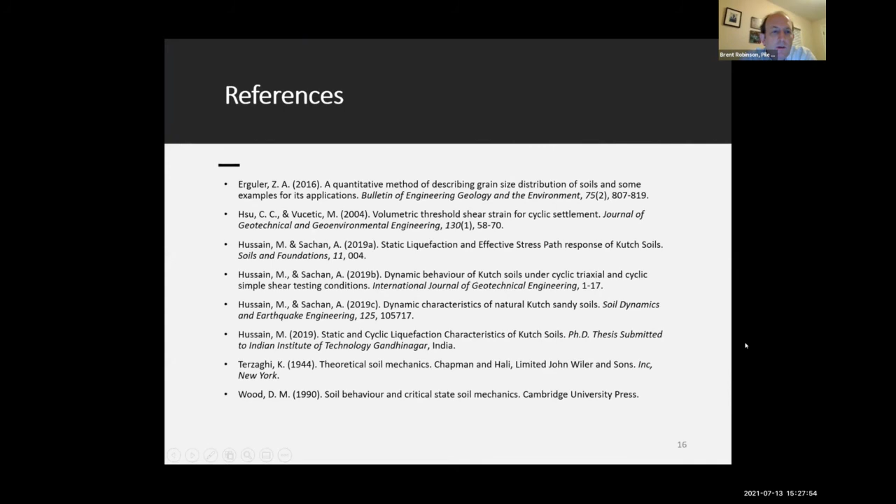Thinking about your conclusion that cyclic simple shear versus cyclic triaxial shows cyclic shear gives a higher pore pressure ratio than cyclic triaxial, and you said cyclic triaxial tends to underpredict — is that a sense that cyclic shear is then perhaps a more conservative test, or that it is capturing a behavior of the soil that is more realistic? How do you reconcile the two, and which do you choose as the truth versus which one is better?

Thank you, Professor Robinson. Actually, what happens in the cyclic triaxial test is the loading is in the axial direction. However, in seismic earthquake loading, the shear waves travel upwards in the horizontal direction. So it is the cyclic simple shear test, where the loading is in the horizontal direction, that actually simulates field conditions better. That is why we can safely say that the cyclic simple shear test represents the field condition better, and we should be using that for seismic analysis.

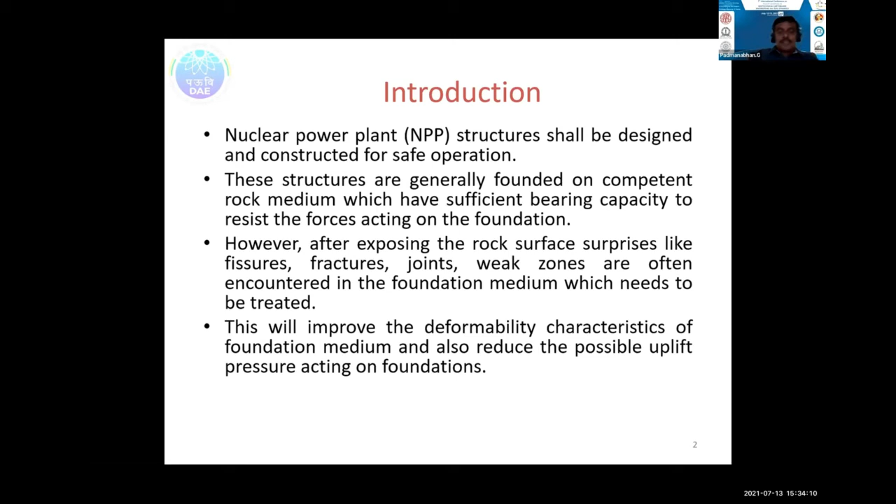The current practice is to do excavation of around 15 to 20 meters below ground level and reach the hard rock strata, then carry out detailed geological mapping to identify the weaker zones, and later take up ground improvement techniques such as consolidation grouting or other methods.

In current practice, the efficacy of the consolidation grouting carried out to achieve a compact foundation strata is measured in terms of permeability values. We carry out permeability tests before and after grouting, and compare the values. If the permeability is reduced, the strata is considered improved.

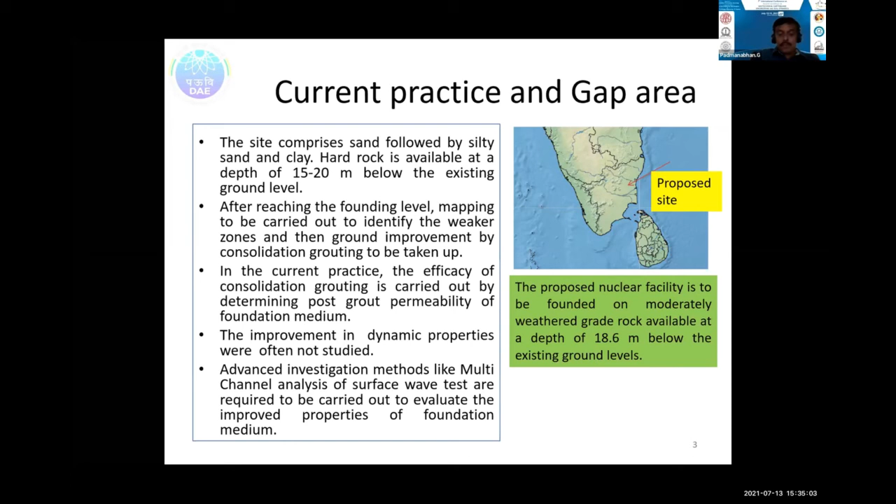Nevertheless, the dynamic properties of the foundation strata were never studied previously, though we can estimate the parameters. In this particular facility, we reached the foundation strata around 15 to 20 meters below ground level, and through geotechnical investigations, we could establish the founding level even before the excavation itself.

Rock patterns were arrived at, and then when the geological mapping was carried out, we could identify certain weak zones in the foundation strata. We did extensive geological mapping for around 1,15,000 square meters, and the foundation strata was mapped. Basically the foundation strata is moderately weathered rock, made up of charnockite type of rock.

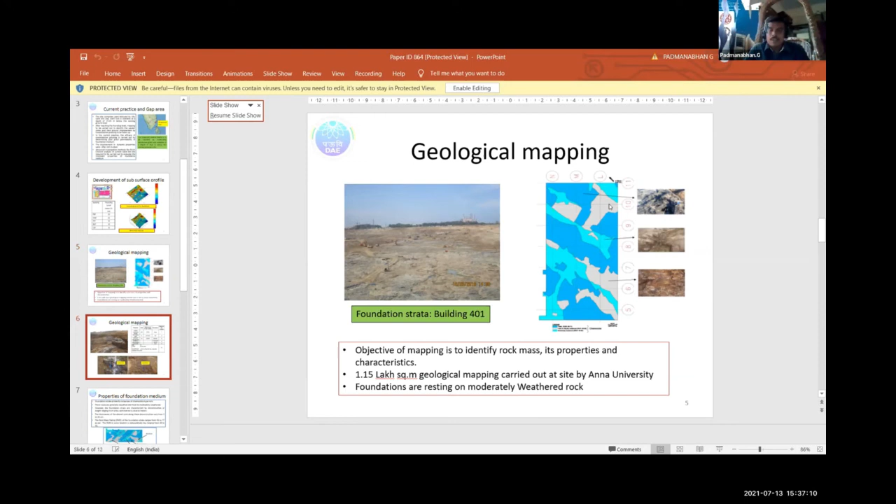This slide shows the important features obtained from the mapping. The foundation strata is primarily comprising charnockite type rock, classified into fresh to moderately weathered rock. Various discontinuities and weak strata were observed, with thickness varying from a few centimeters to several meters, and the rock mass rating varied from 48 to 77. As per the rock mass classifications, the foundation rock is classified as moderately weathered rock.

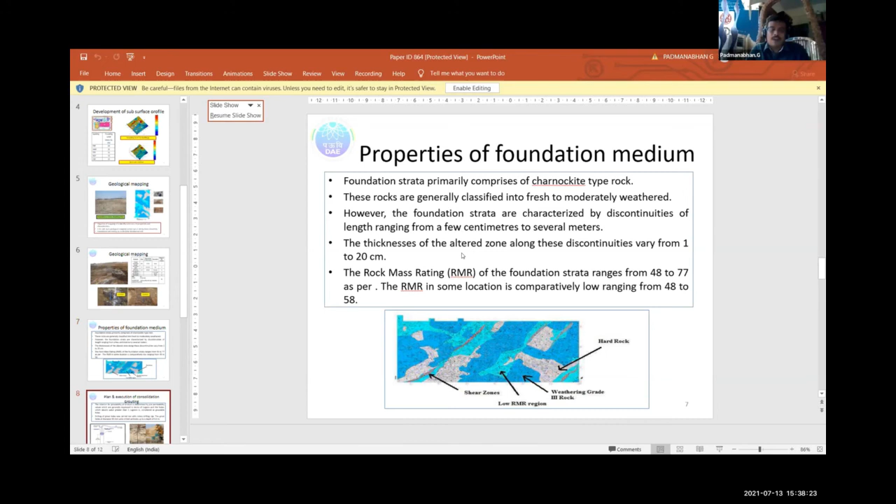Subsequently, after exposing the foundation rock, we carried out the grouting. Before taking up the grouting, the permeability of the foundation strata was established. If the permeability is more than 1 lugeon, that strata is considered groutable, and then we executed the grouting with a pattern of grout holes.

The grout holes were generally drilled with rotary drills, with a diameter of 90mm, and they were drilled up to around 6 meters below the foundation strata, and then grouting was carried out.

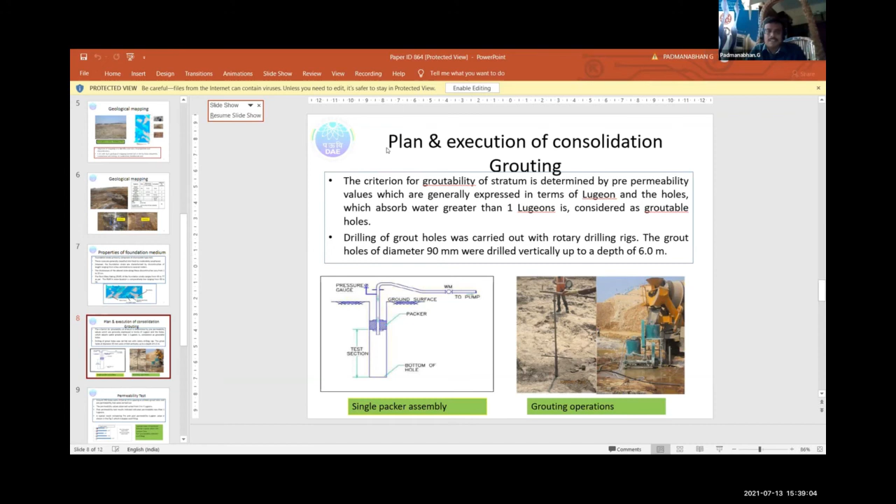After the grouting, we again established the permeability value by carrying out the permeability test. In this project, around 250 holes were drilled at a spacing of around 10 meters. That is basically the primary holes.

Subsequently, for the primary holes we did permeability tests, and then we did the secondary holes. Then again the permeability values were considered. After the improvement, we were able to observe the permeability values around

This is the general practice, but considering various advanced field investigation methods like multi-channel analysis of surface waves and seismic cross-hole tests, we can effectively utilize these tests to find out the improvement in the engineering properties of the foundation strata after the consolidation grouting.

So the multi-channel analysis of surface wave tests were conducted at this particular site before taking up the consolidation grouting and after taking up the consolidation grouting. Around 6 profiles were considered for carrying out this test.

This figure clearly shows that prior to consolidation grouting, there are weak zones where the shear wave velocity of the foundation strata is around 1,800 meters per second. After the consolidation grouting, we could see the improvement in the foundation strata, with the shear wave velocity increased to around 2,100 meters per second.

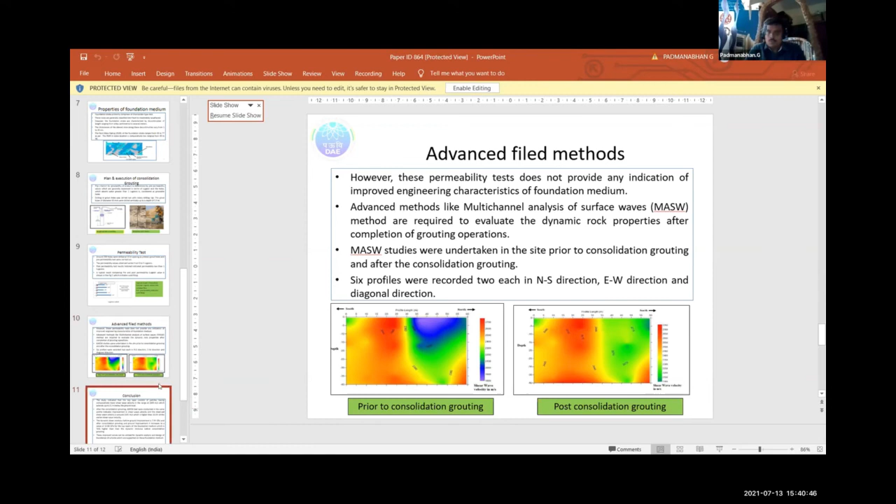To conclude, the study indicated that the top layer consists of a weak zone, having a comparatively lesser shear wave velocity of around 1,800 meters per second, extending around 15 meters below the ground level. So after consolidation grouting, and with respect to the conventional

permeability test, we were able to establish the efficacy of the grouting, but additionally the MASW tests were conducted to assess the improvement in the shear wave velocity. We observed around 16% increase in shear wave velocity due to the consolidation grouting.

This in turn improves the shear modulus of the foundation strata, which is an important parameter and input for carrying out the foundation system design. We observed around 36% increase in shear modulus due to the consolidation grouting.

So these values were effectively used, and can be effectively used for the design of foundations. Thank you.

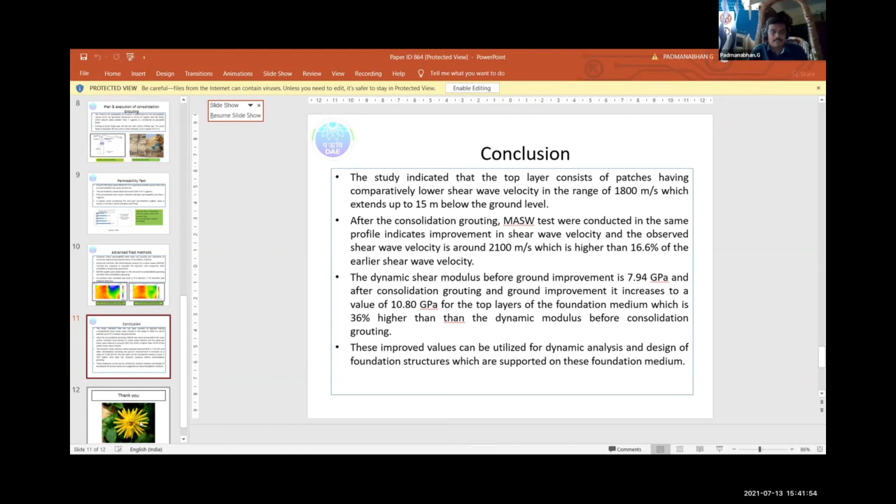did you get a sense through MASW or cross-hole seismic tests what the vertical extent of the improvement was? Based on what you showed, how deep did that improvement go relative to the two color plots that you just showed, showing the improvement from pre and post grouting?

Yeah, there is definitely an improvement. Even though we have done the seismic cross-holes and MASW tests, we did earlier, so there was an improvement.

So you could see that the vertical extent of the improvement extended down well into the 15-meter zone that you were talking about? Yes, around 15 meters we were able to see that. Yeah, very nice.

This top layer, after exposing the ground surface, we were not able to ascertain what is the depth of the weak zone. So then after grouting, yes, we were able to see that, and the MASW really gives that depth of the weak zones.

Yes, certainly. Any other challenges in collecting that data before and after? Yeah, the basic challenges were actually the discrete number of the boreholes. So before the investigations, with the discrete number of data, what we did is actually